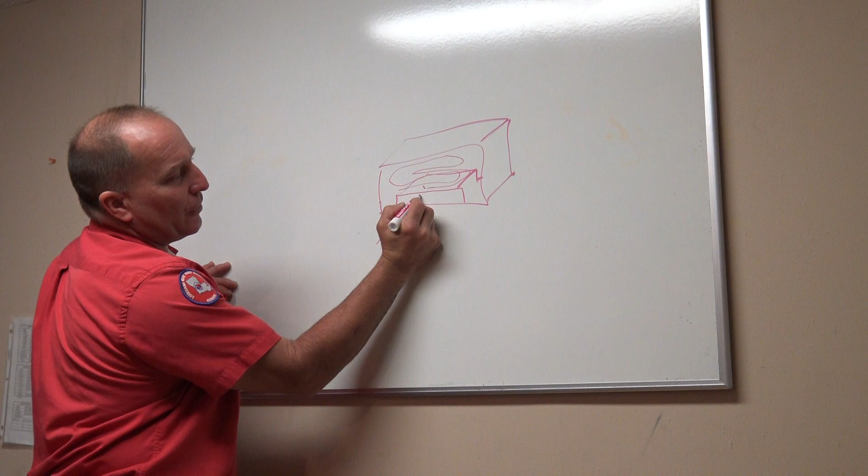So when you get inside of here, if I take a match with an extension, so here's my extension, and there's a little roach clip on the end of it, and you have two stove matches, which is what I use. First thing I'm gonna do is test this furnace with my limit switch, which means I undo my blower motor lead and run the furnace, let it overheat the chamber, get it hot. My blower motor's not running, my limit switch is sitting right here.

My limit switch kicks out, then I pull my burners out from underneath that Ducane furnace, I pull them out, set them on the side, and then up inside that chamber I need to find out if there's any cracks in that furnace. Now since my chamber is extremely hot right now, because I just overheated my limit switch, that chamber's hot like a son of a gun.

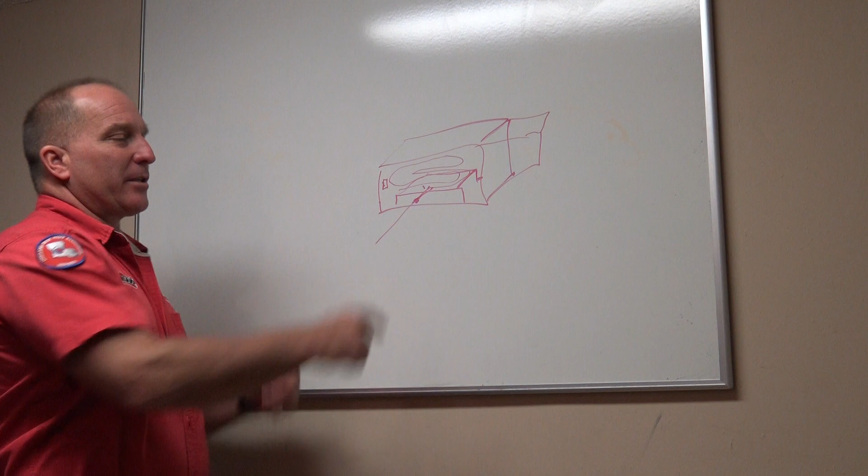The burners that I pulled out of there, I use lineman pliers and channel locks to literally unscrew everything and pull everything out and set it on the side. I'm not touching anything, or you could use gloves or whatever may be the case, but it's hot like a son of a bitch. It just got finished overheating.

When I do that, I take my vacuum, and my vacuum has got a PVC pipe with an elbow on the end of it. Then I stick that pipe up inside of there and start banging around up inside there with my PVC pipe, knocking all of the rust that's in that chamber down.

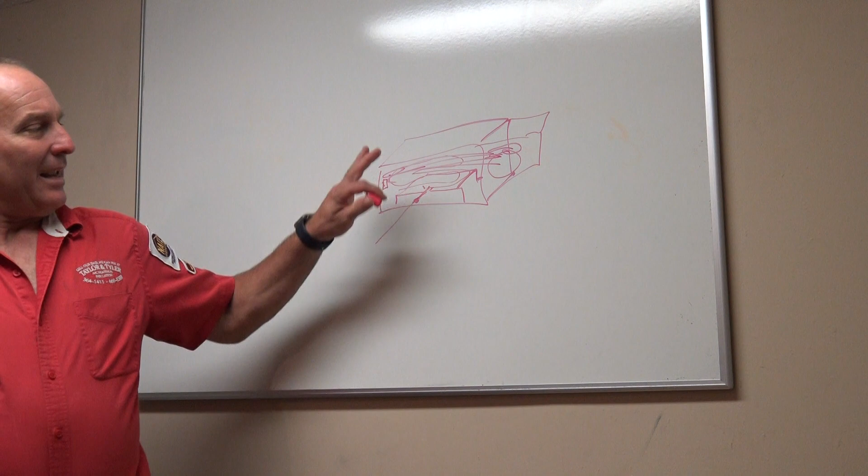Then I take my match with an extension. I plug my blower motor back in. So when that blower motor comes back on here and it's blowing air across my chambers, any air pressure in that chamber is going to blow down if there is a crack in the chamber itself. Because if you look at it, if you're behind here and you move the blower motor out of the way, here's what you're looking at now. Now I'm looking through, I am the blower motor looking into my chamber, and this is what I'm looking at.

So air is passing here, here, here, and here. If there's a crack anywhere, air as it blows is going to blow inside my chamber here. Remember, inside my chamber is underneath here, because that's where your flame is going, right? Your flame goes inside this chamber and attaches to your draft hood up at the top. The air is passing on the outside of your chamber, which you can't see because it's inside the box. So air pressure gets into the chamber and then blows down inside of here.

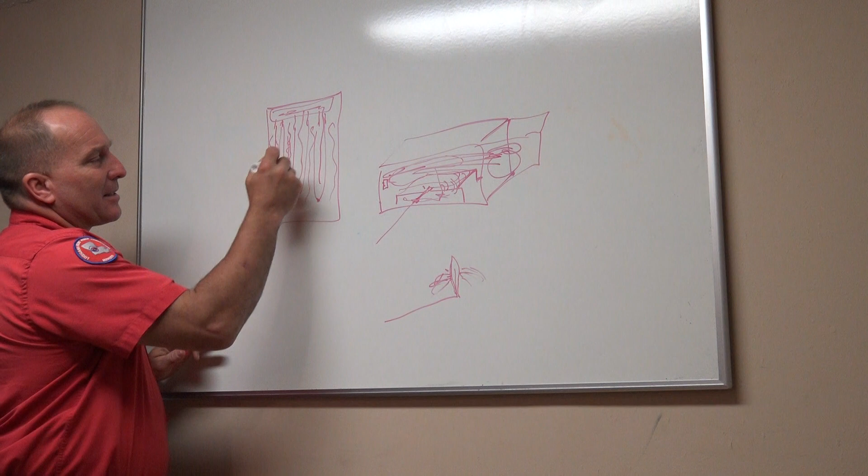When I stick that match up inside there, what am I looking for? Here's my match extension, here's my flame coming up with a point on it, coming back down - there's my nice flame going up inside there. If my flame starts doing like this, what happens? That's air - that means I'm getting air from inside this blower compartment into my chamber, and it's blowing down, which is where my match is at.

There's a crack in the furnace right there. Shut the gas valve off, system's condemned. Now, I was telling you I went to Algiers.

I did this exact heater check on the system. Went up there, told the customer, a 22-year-old furnace you got up there has got a crack in it. I tested it and you are blowing down, you got a crack inside that chamber. I said, I can get you a price on a new furnace. He said, you can give me a price on it. I don't think I want to replace it right now.

I said, now, that's a crack in your furnace. That's carbon monoxide leaks in your house. He goes, yeah, but I got carbon monoxide detectors in every room in the house. I hardly ever run the heater, I like it really cool, I barely turn my heater on. I think I'll be all right.

Again, sir, I'm going to tell you, that's a crack in your furnace. That's carbon monoxide leaks in your house. Carbon monoxide leaks are a deadly killer. It is unsafe to run that furnace. He said, I understand what you're saying. I'm not going to have you at any type of liability - it's my decision to run that furnace. There's nothing I can do about it.

I wrote it on my invoice: customer understands there is a crack in the furnace, understands it is unsafe to run the furnace, and decided to run the furnace himself. So I leave, nothing I can do. He doesn't want to do anything with it, right? Next year I come back, do a heater check again.

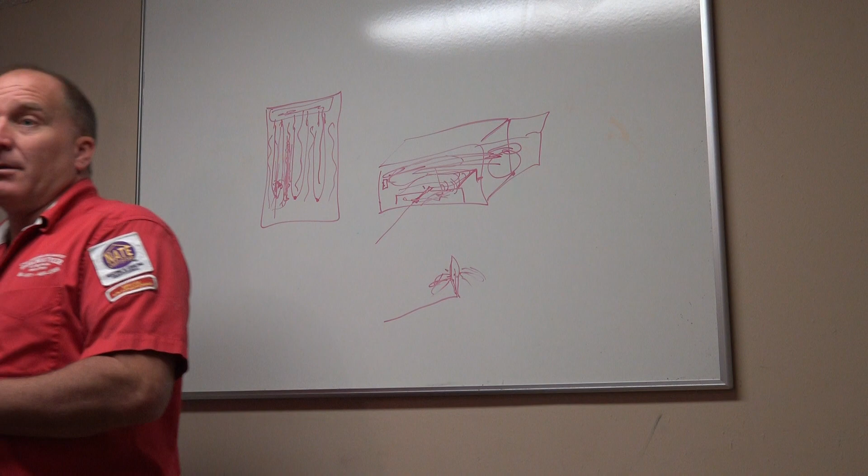Went back, I knew right where it was. Boom, found the crack again. Sir, you got a furnace crack as I told you last year. The crack is still there, it's getting a little bit larger. It's really unsafe to run that furnace, it's only getting worse for you. He said, how much is a new furnace? This time he replaced the furnace. It took two times - it happens.

You know, sometimes they just don't have the money. No money, no life, whatever.

Now let me ask you this: because you have a crack in the furnace, does that mean you are putting carbon monoxide in the house? No. How's carbon monoxide formed? It's formed in the exhaust gas from the furnace.

If you have a perfect running flame, a beautiful flame, then you may not be producing carbon monoxide, or enough carbon monoxide, in that flame. If you have a bad burning flame, lack of oxygen, you can produce carbon monoxide. So if he has a clean burner and his flame is nice and blue and pressures are good and everything looks good, and he's just got a little bitty crack and he hardly ever runs the furnace...

He likes it 60 degrees in the house, 50 degrees in the house. He'll hardly ever run it, he might kill the chill. It's his responsibility - I've got to tell him he's got a crack and it's unsafe. Is he literally going to put enough carbon monoxide in the house to kill the family? Probably not, but you can't say that. You have to say, I'm recommending replacing the furnace. It's unsafe.

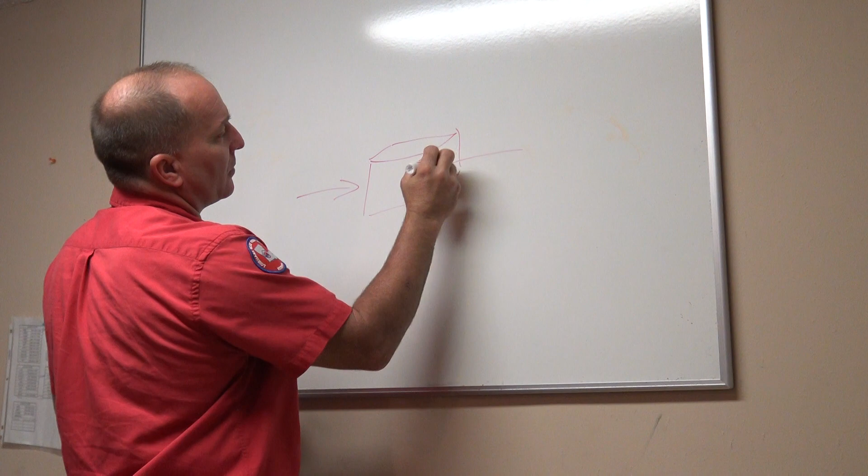This is coming in and this is coming out. Okay, got your hole coming in, coming out. Right here, there's going to be like a little port, basically. There's a little screw right there that you unscrew, and then you take your manometer.

The one that I have is a Fieldpiece, and there's a P1 over here and a P2 over here. You turn your manometer on INWC, inches of water column pressure, for your reading. Then you take your hose from your P1, actually it comes from the top, not the bottom, and this is your return.

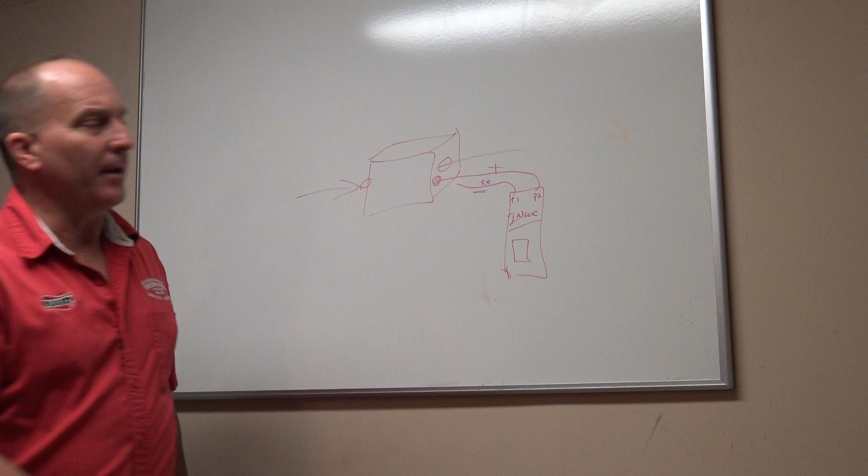I'm going to call this return, and this is your supply. Because we are doing gas pressure, I want to measure my supply, my positive pressure. This one's negative, this one's positive. You do not hook the negative up to it, okay? So this is positive on here.

When you energize your gas valve right here, here's your coil on it, which is going to be W and C, energizing your coil. When you energize your coil, there is a plunger basically on here that is going to hold down your gas valve, or energize your gas valve, which allows gas to flow through.

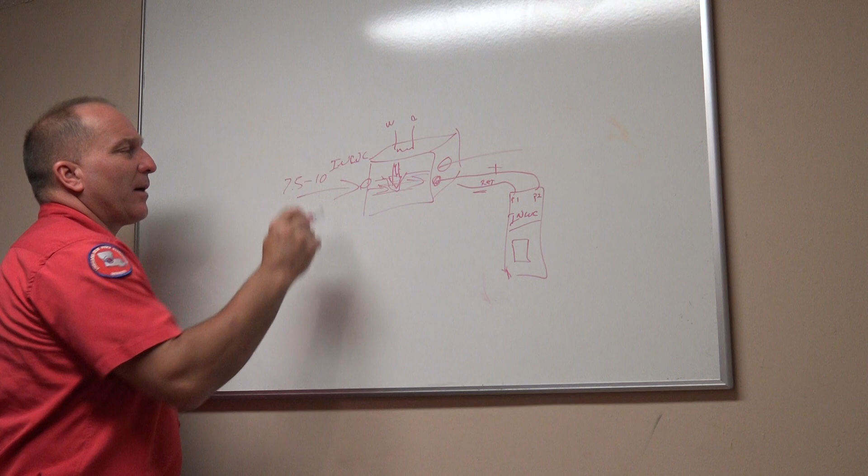Now, you energize it, the plunger comes up, gas is through it. You are now reading the pressure coming out of the gas valve. Coming in the gas valve, you should have 7.5 to 10 inches water column pressure. Coming out of it, you should have 3.5 inch water column pressure coming out of the gas valve.

Now, where does it go from here? It comes out and literally goes into your burners. There's burner 1, 2, and 3, okay? These are your little jet engines that you see on your burner systems, and they are shooting flames into your chamber.

When I have my port connected here and I have it on P2 in inches of water column pressure, I should be reading 3.5 inches of water column pressure on my manometer. If I am reading 2 on the manometer, does that mean my gas valve is bad? The answer is no. That just means I'm getting 2 inches of water column pressure out instead of 3.5.

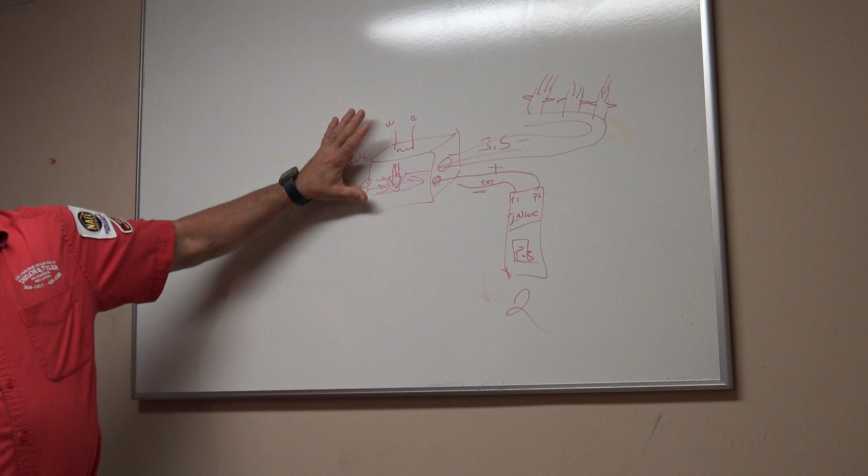What if I do have 10 inches of water column pressure pushing in, but I'm only getting 2 out? Up on top of the gas valve here, there's another screw, a regular screw right there. You unscrew that one, and then you stick your little screwdriver down inside of there, and down inside is another little port with another little screw on it.

What you do is you unscrew it. What am I doing when I unscrew it? I'm actually allowing this plunger to go up higher. So now my 2 inch water column pressure, I can adjust it to 3.5, if the gas valve's good.

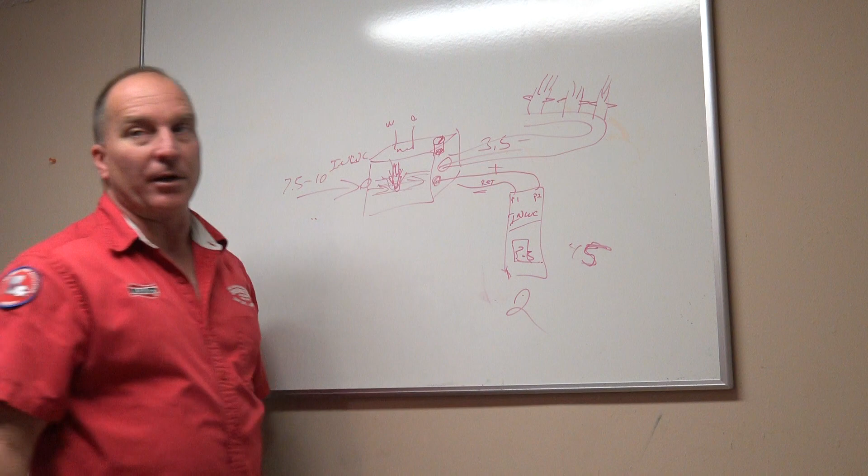So let's just say the gas valve's good, and I'm getting 4.5 out of it instead of 3.5. What do you do? Same thing. Unscrew this, stick my screwdriver down into it, tighten it up, loosen it up, figure out which way I'm supposed to be going, until I get it to 3.5 inch water column pressure.

The amount of pressure coming out through these burners shooting out makes a huge difference. If I have 2 inch water column pressure, my burners are going, and you will get to understand the sound of a good, short burner with 3.5 inch water column pressure.

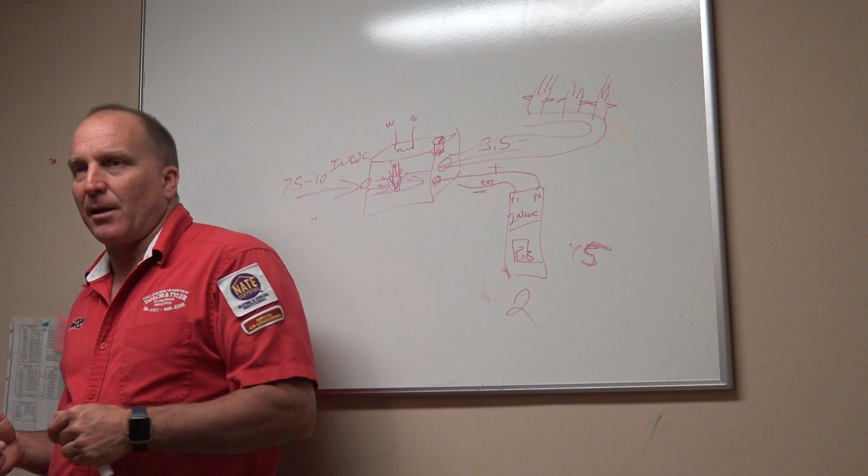So when it comes on with 2 inch water column pressure, the flame's going in nice and pretty, but it doesn't sound right. If you've got a good force of pressure going in, you'll hear it, because 99% of the furnaces you go to have the right gas pressure. 1% you may run across that don't have the right gas pressure. If it's 4 to 4.5 inch water column pressure, you may hear that thing blowing hard out of there, heating it up fast. You need to notice that doesn't sound right.

Do we have to check water column pressure on every single one we go to? The answer is no, we don't have to.

Should we? Just for our own enlightenment? The answer is yes. It takes 2 minutes to hook it up and check it. You get to check a few of them, and you know what gas pressure is coming out of that system, and it may be 3.6, 3.2, 3.5. It's running good, the flame's burning good. Do you have to make an adjustment from 3.2 to 3.5? No.

So I've been on a floor furnace. And you know, in these videos, guys, the main thing I'm going to tell you is that you won't get in a book, and a lot of times you're not going to get at Delgado's. You're going to get 30 years of experience in this video, because I'm going to give you stories that I've come across in the last 30 years, all the service calls I've been on, the problems I've come across. These are the things that actually mean something when you're going to customers' houses learning this stuff. Stories can ramble on, but they are some of the most important things to remember, and it's something not to take for granted.

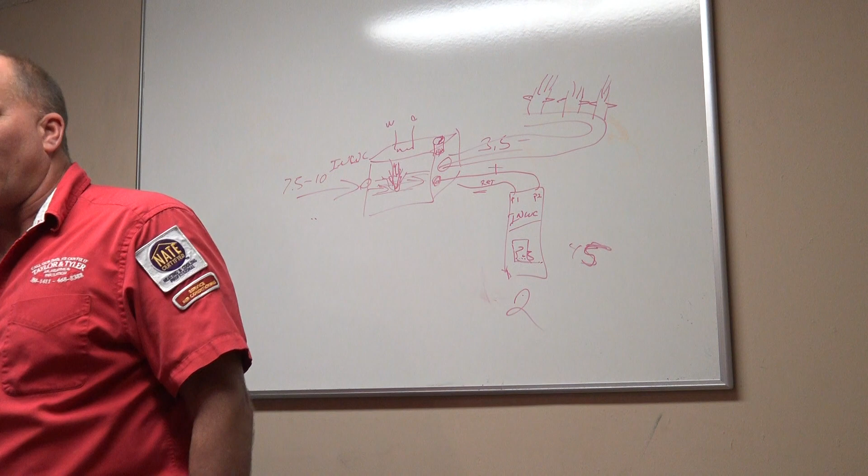It's all encased in metal, with a grate on top, and you get what's called waffle feet if you step on a floor furnace that's 50 years old. There's nothing stopping the heat coming from that floor furnace. There are no limit switches in the 50-year-old gas furnaces for floors, but there are limit switches in the new ones we put in today.

So if I take a 50-year-old gas floor furnace out and put a brand new one in today, customers complain the house doesn't get as hot as it used to. That's because there's a limit switch in there — the flame runs, heats up the limit switch, and shuts the system off. When it cools back down, it closes again, and the floor furnace comes back on, only allowing it to produce so much heat. Whereas the old one, 50 years old, had no safety features at all, and they just got hot as a son of a bitch.

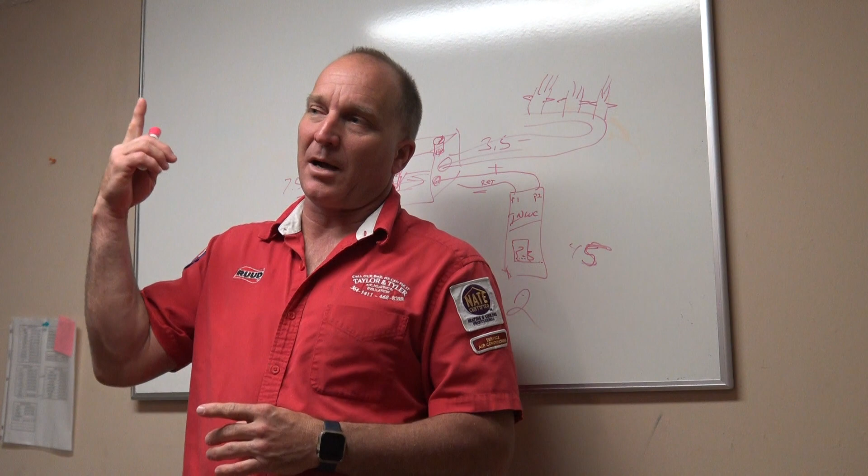You learn from one time of waffle feet — you don't step on the grate anymore. It only takes one time. Unless you're really stupid, then you get waffle feet for sure. Some of those are hot — grandma had all those in her house, boy they are hot. You learn one time.

Now, can that floor furnace catch a rug on fire? Yeah, absolutely. There are no limit switches in those old ones. That's why they're in houses with wood floors, and again, they're all encased in metal, but those floors get hot. I've seen a bunch of times where little rugs get pushed over to the floor furnace and catch fire, or burn up and singe really good. What if your couch is right next to it? Potential for fire. So you've got to look at all that stuff.

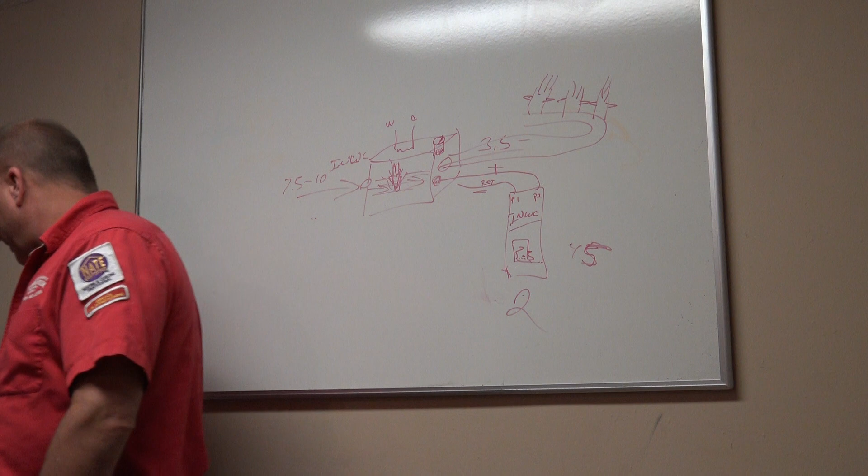All right, so we're still on gas valve, right? I get off on tangents, don't I? Okay, tangent aside — gas valve energizes, static pressure 3.5 inches water column pressure, not high or low. A fair valve may be old but in working order. Bad: 24 volts applied to the gas valve and it does not open, or static pressure too high or too low and the valve will not adjust. So if I'm running 5 inches water column pressure out of here and I start adjusting it and it doesn't adjust, I replace my valve.

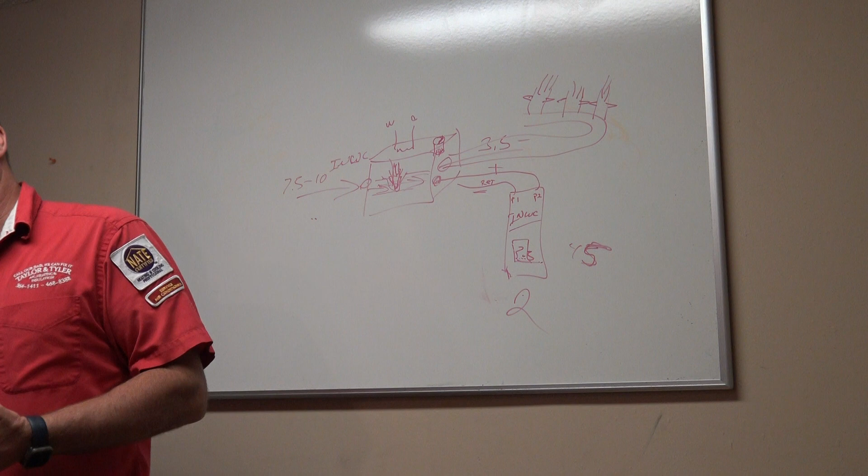Today's valves are what we call 100% shut-off valves. 100% shut off means what it means, the 100% shut off. Now, I'm going to give you some of the old kind of valves that you're going to run across on old furnaces. 100% shut off means that when my spark igniter is sitting over here and it's sparking onto my burner,

then I have a flame sensor rod over here sensing my flame. The only way I'm going to ignite the igniter is I have to shoot all my gas out of this whole system, and as it goes through here and this spark is in here, it ignites this flame, which goes down this little wing all the way across and ignites this flame, then goes through this wing over to this flame, ignites this flame. Then the flame sensor says, okay, I know I have flame here, continue to run, gas valve. That's today's furnaces right there.

If the flame sensor does not sense that there is a flame on the third burner, it will run for 4 seconds and then shut that gas valve off. It will try it again. The induced draft motor runs, pulls in my negative pressure switch.

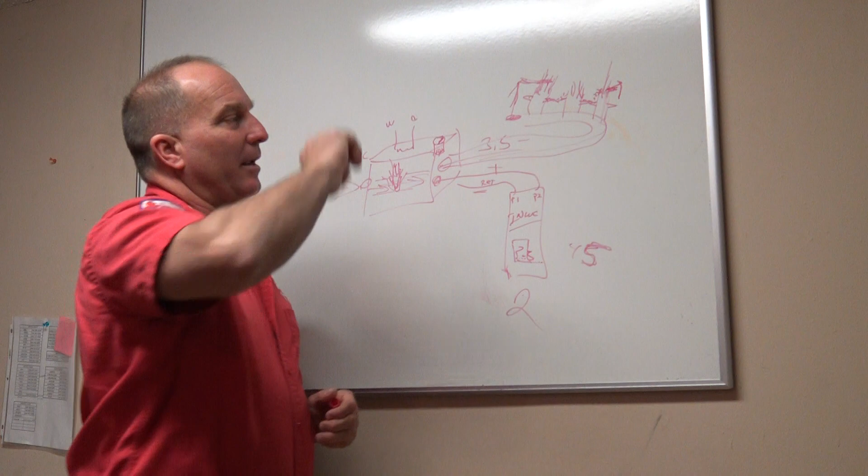Gas valve energizes when the spark igniter ignites. Boom, shoots out over it. Flame ignites on my igniter. It runs to my second one, it ignites. It runs to my third one, it ignites. It runs for 4 seconds.

If the flame sensor does not recognize that there is a flame there because of a bad flame sensor, a broken wire, whatever, it will shut off again. It will do this 4 times. After 4 times, it will shut the system off, and the only way you get the system back on again is you turn the power off and turn it back on, and then you try it again, and it will do it again.

How do you now fix the system? You have to test the flame sensor, which we're going to test in a few minutes here. We're going to test the flame sensor and see if it is getting the correct DC amperage.

A second type of gas valve is going to be like an 80% shut-off gas valve, which literally can light a pilot. So it's got a pilot tube coming out of it. We'll call it right here as a pilot tube. So this pilot tube is running down over here to my igniter. So my igniter would kind of look like this. So here's my gas would shoot through a piston right here, and then my flame would shoot out like this, and then kind of do like that, and it's a nice little blue flame shooting out of it, okay?

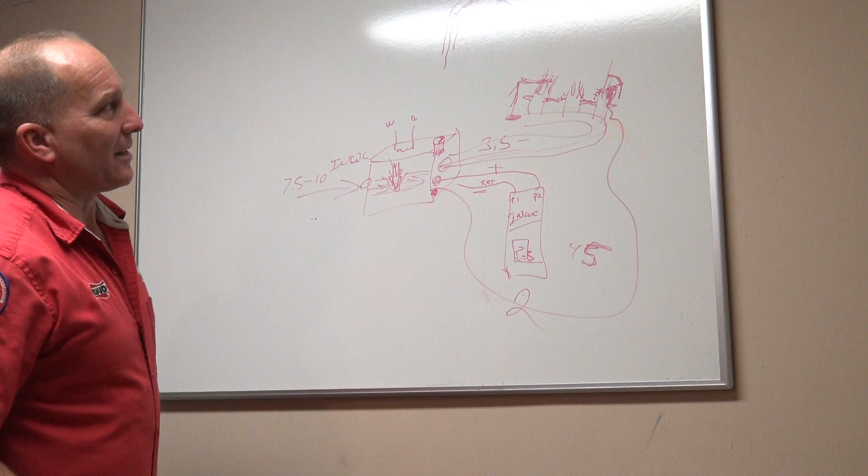So that little pilot is no more than, say, 2 inches at the very most, 1.5 inches or so, and that little pilot is shooting out across my flame. Once the pilot ignites, there is actually then a flame sensor on the pilot that says, okay, my pilot is lit now, so now it's okay to send the other 80% of gas through. Remember, my first opening was only open on a pilot tube, which is a little silver tube about the size of a pencil.

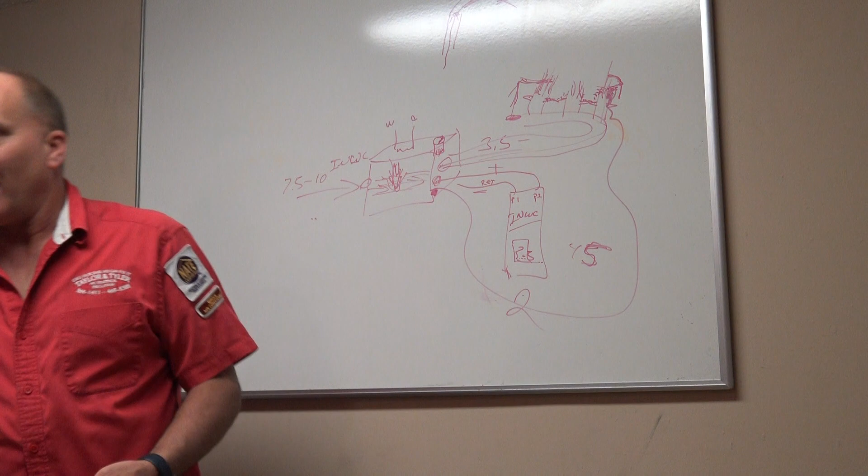If you have to take apart that pilot tube, I am going to give you some tips here that will save your ass if you remember them. You won't remember them the first time. You're going to have to replace the gas valve, is what you're going to have to do. Then it will cost you a couple hundred dollars, 2 hours of your time, and then you will go, I think Eric told me something about that. Let me go watch that video again. And here's what it is.

That little pilot tube has got a brass fitting on it. So it's a little silver pilot tube with a brass fitting. It's got a... can't think of it, flare. It's like a flare. It's not a flare, it's a little dial on the end of it, and it released... I can't think of the name for it anyway, I'll think of it in a second.

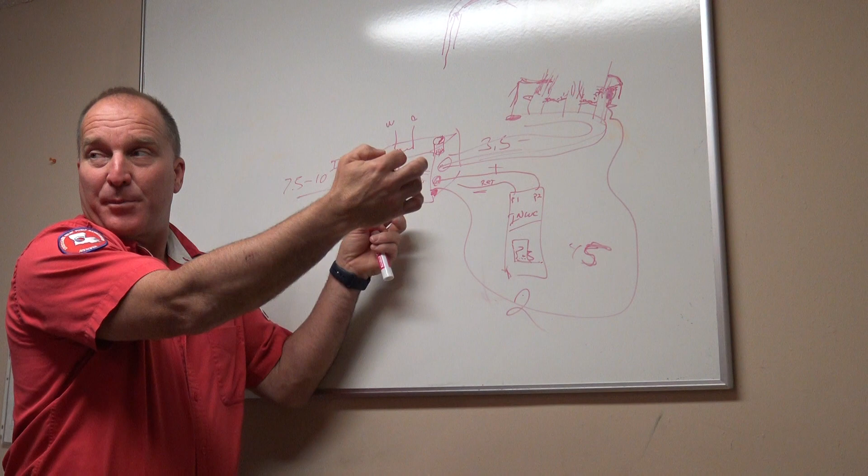But as you screw the brass fitting on, the little brass piece on the end flares out and basically grabs the little silver tube and crushes it, stopping gas leakage. It disconnects from the brass piece, so now I can unscrew the brass piece, and that little brass piece that disconnected is clamping the silver tube. Now here's where experience comes in, from how I've screwed it up and how I don't screw it up anymore.

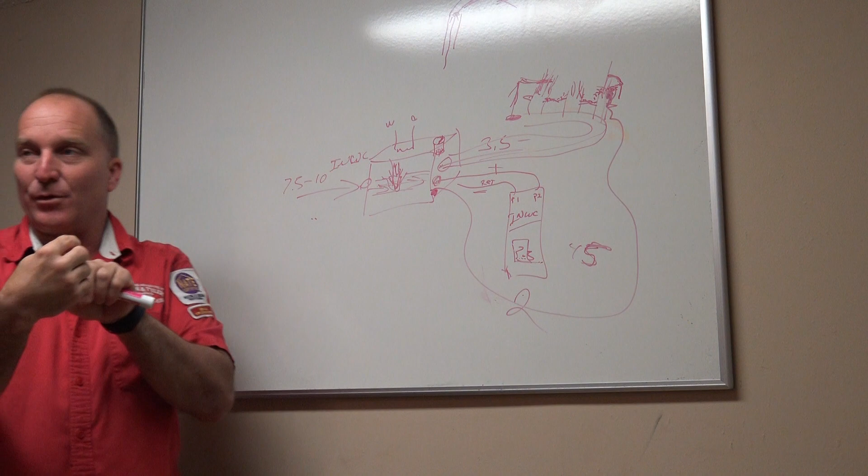Every time I tell somebody to do this, they will screw it up at least once. When I take that pilot tube out, it unscrews, so the brass piece continues to roll and slides up and down on that little silver tube - a ferrule, that's what it is. So the little brass piece is connected to the ferrule. When you screw it in, the ferrule ends up flaring or crunching down onto the silver piece.

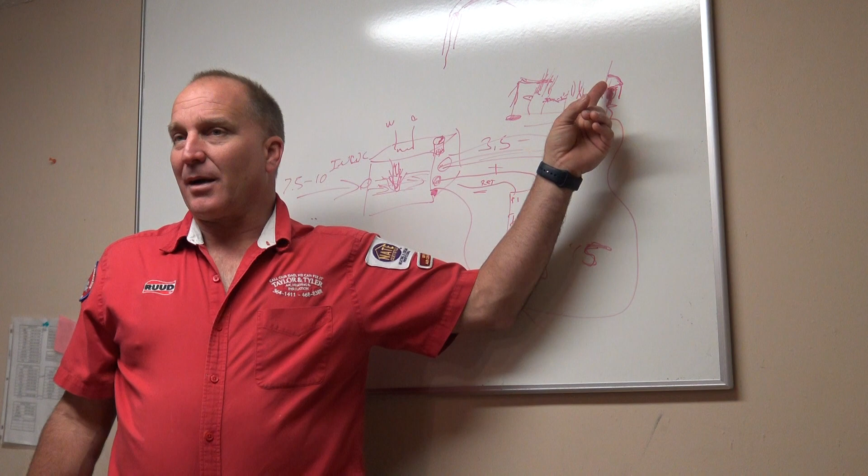That's where it stops your leakage and adheres to it. So as I take the pilot tube out to start this system up, my pilot isn't having a flame come out, or it's a very, very little flame barely coming out of it. So I know I probably got a clog in that pilot tube, right? Well, how do I clean the pilot tube out? I'm going to give you a simple way to clean it out.

You realize this ain't but like a gnat's fart of gas pressure coming out of here, right? So you take this out, and then take your dry nitrogen tank. After I pull it out, I put my dry nitrogen tank and blow it through there. It's just a piston, a little bitty pinhole in a piece of metal, is all it is. You're not going to blow a big hole in it. You're just going to build up pressure on it to force more pressure out the other side. And if there's any crap in it, it's soot.

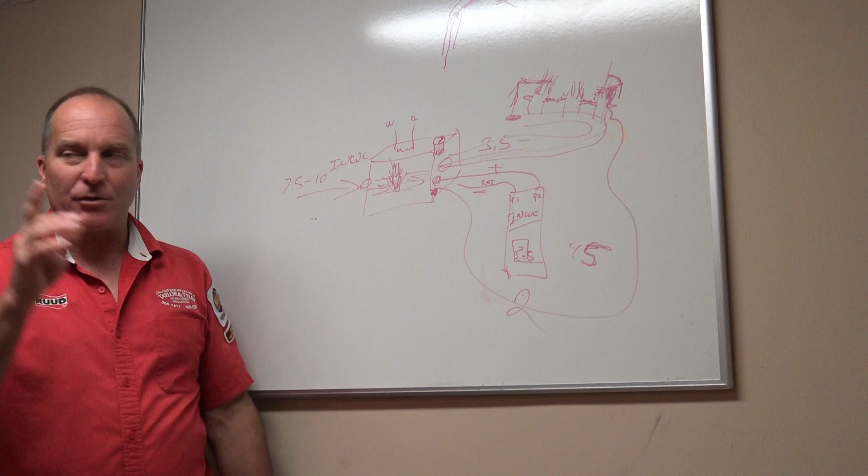So you can easily blow the soot out with high pressure dry nitrogen, right? So I just hook my little dry nitrogen tank up to it, and I blow it out. And then here's where the experience comes in. When I go put that silver tube back into my gas valve - remember, when you loosened it up, you could grab it with your finger and loosen it and take it out. When you put it back in, this is where the experience comes in.

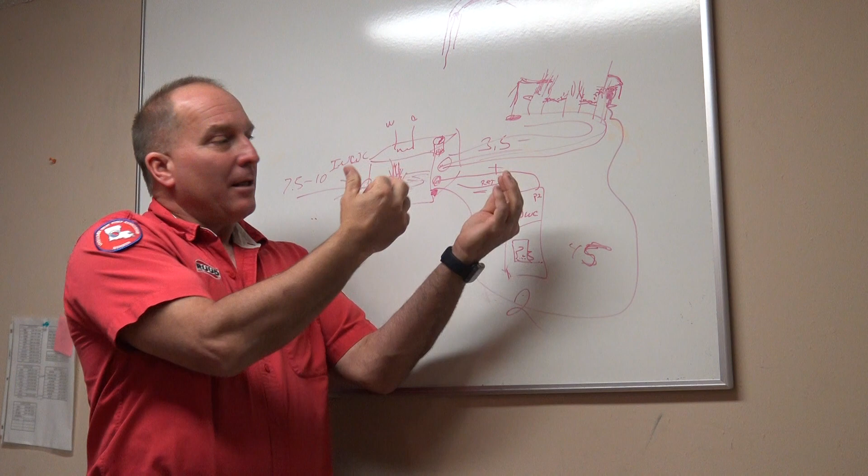When you put it back in, you have to wiggle that silver tube just in the correct position to where you can still tighten it back up with your fingers. If you put it in and you can't tighten it up with your fingers, you are cross-threaded. So if you grab your crescent wrench and start tightening it right there, you just screwed up the gas valve, because the gas valve is going to cross-thread, not the brass piece.

So now you've got to buy them a new gas valve, because it will not go in now. So the most important thing, as you're putting it in, you keep wiggling that tube this way, that way, this way, that way, this way, till you finally get that thread just right and it goes in with your fingers. If you can't get it in with your fingers, do not put a wrench on it. You will buy them a new gas valve. Trust me, I have done it.

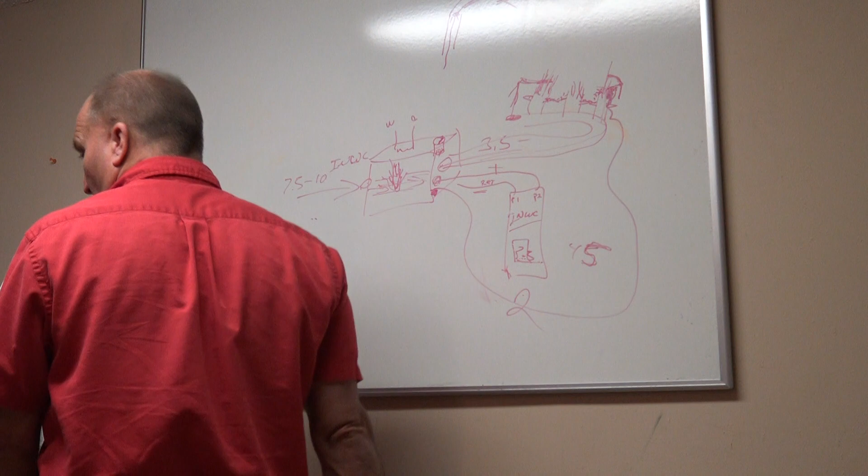The other kind of gas valve will be a pilot thermocouple gas valve, where there's a thermocouple coming off the top of the gas valve. So you've got a little deal coming up here, and then a thermocouple that runs over, and there's your thermocouple out here. You take the little knob, push it down, and put it in the pilot position. As you put it in the pilot position and push it down, it allows gas to flow through here.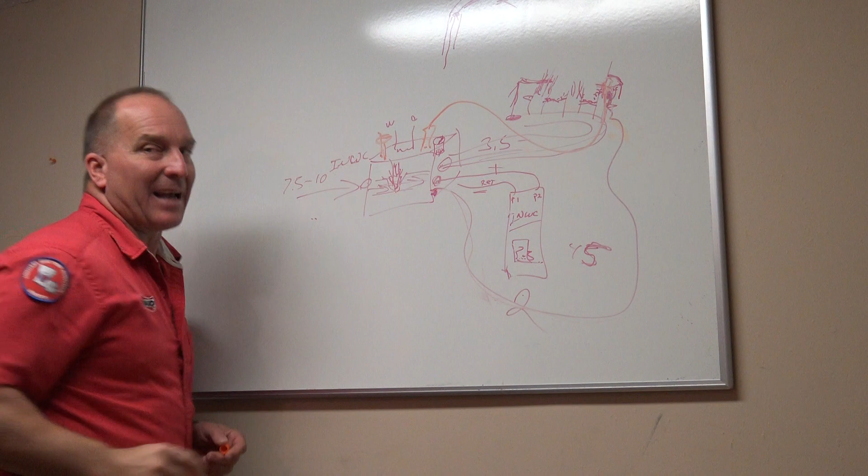You light your pilot with a match. The flame comes out, hits your thermocouple. The thermocouple heats up, gives your resistance back, and holds the gas valve down. Because as you're pressing this down, it's allowing this plunger down here to release that gas valve, but it's not going to allow it to come out until you turn the gas valve to the on position and energize it, okay? So I light my pilot.

After I light my pilot, I let my little compression thing up, and after I let it up, my pilot should stay lit. As it stays lit, now I can turn this knob into the on position. When I turn it into the on position, then I can apply 24 volts to my gas valve from my thermostat by turning my heat on.

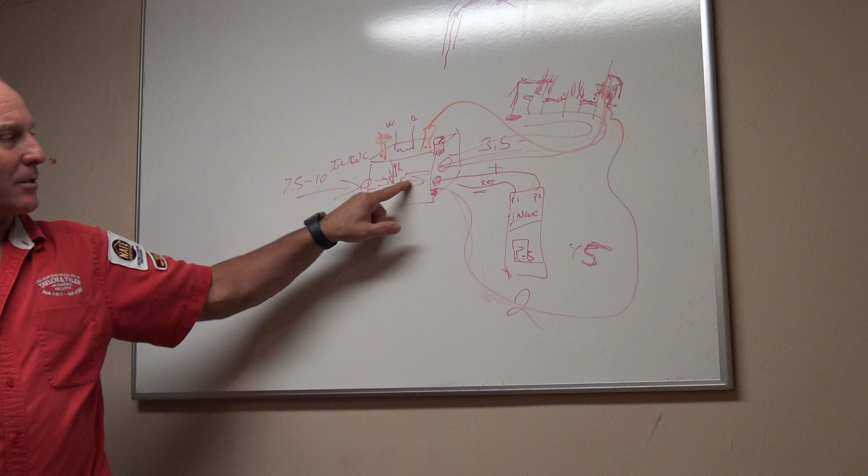It brings 24 volts to my gas valve, which then brings the plunger up, allows gas to flow through. Now I got gas going into here. It lights my pilot, which is already lit. Gas shoots out, lights my burner. My burners go across, light each one of them.

And then my flame sensor, which the old ones don't have flame sensors on it. So your only flame sensor is your pilot, your thermocouple. If your thermocouple is not lit anymore, is not working, then nothing will work. If that thermocouple is bad, that's your flame sensor, remember. It's telling you they have a pilot there. If there's no pilot there, gas valve won't work. That's simple. So that is your flame sensor, the thermocouple.

They only cost like, they used to cost $2, they're probably $22 today.

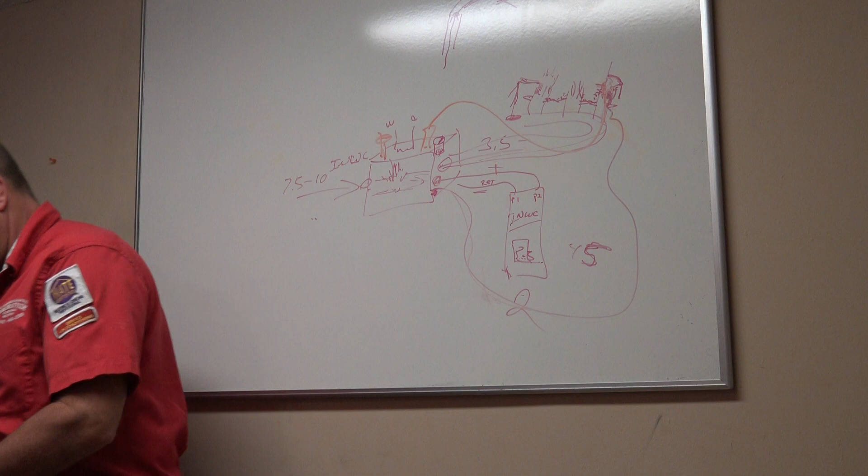Got a quick question. Yep. At one time, like you're talking about the pilot thermocouple, that's all they had on hot water heaters and central heat systems. Today, hot water heaters still only have a thermocouple, you just light a pilot. Same thing, there's no change in that because there's no voltage going to that furnace. And all a thermocouple is doing, guys, is just giving flame rectification, that flame is there and allowing that gas valve to energize. So when you turn it into the on position and you take your thermostat for your water heater and you turn it into hot, it then closes the circuit and it allows the gas to energize on your hot water heater and turns it on.

If you take a millivolt gas valve, now a millivolt gas valve is going to be one for a floor furnace. So inside there, you have three connections for your wires.

And then you have a pilot generator, and your pilot generator will go here, and then you have two wires coming down. One of them are actually connected right here, and then they branch off. And then one will go here. Then from here, it's gonna go with a wire coming up to your thermostat, and then back down, we'll jump over the wire there, and back down to the other side. That's a millivolt gas valve.

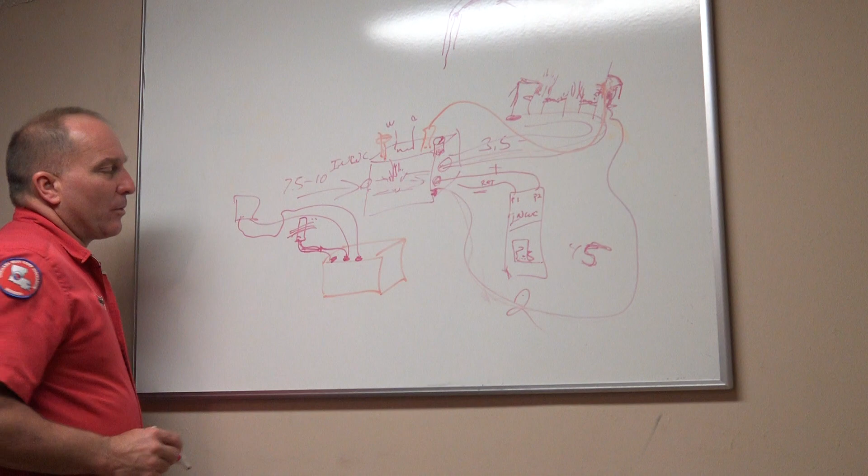You light your pilot, your flame comes over your millivolt, your pilot generator is what it's called, a pilot generator. Your pilot generator heats up, it produces millivolts. The millivolts therefore energize your gas valve, which say, hey gas valve, allow your gas to continue over my pilot.

So it's just like this gas valve. You have a little compression on it, you push down in the pilot position. When you do, it allows gas to come out, in order to shoot your flame out right here. Flame shooting out over it. Pilot generator heats up, produces millivolts, sends millivolts back to your gas valve here, energizes your gas valve here and says, okay, continue shooting gas through here.

Same as a thermocouple, pretty much.

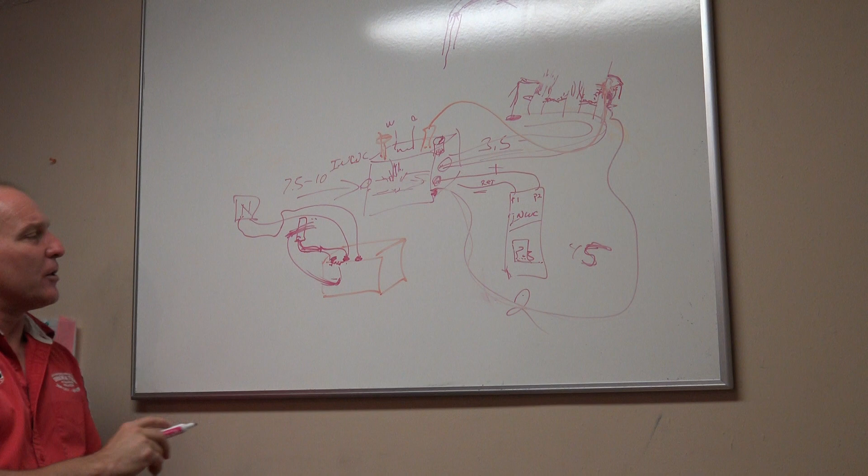Then from there, you turn your thermostat on, which is a normally open switch because you put it in the off position. You turn it heat on, it closes the switch, sends voltage from here to here, which comes over here, which your coil is now between here and here, which energizes your gas valve and allows gas to come out for your burners.

Simple. Just simple, simple, simple, simple, simple.

Yet they're so difficult to work on because they're a pain in the ass and they're underneath the house and nobody likes working on them. But technically, they're simple. Those are usually on floor furnaces. Yes, or wall furnaces. That's the exact setup that you're going to get.

Now, in between here, can you have a limit switch? Yeah, you could. Like wall furnaces will have limit switches. Again, 50-year-old wall furnaces, no limit switches. Today's, they kick off, you know, they're only going to get so hot today.

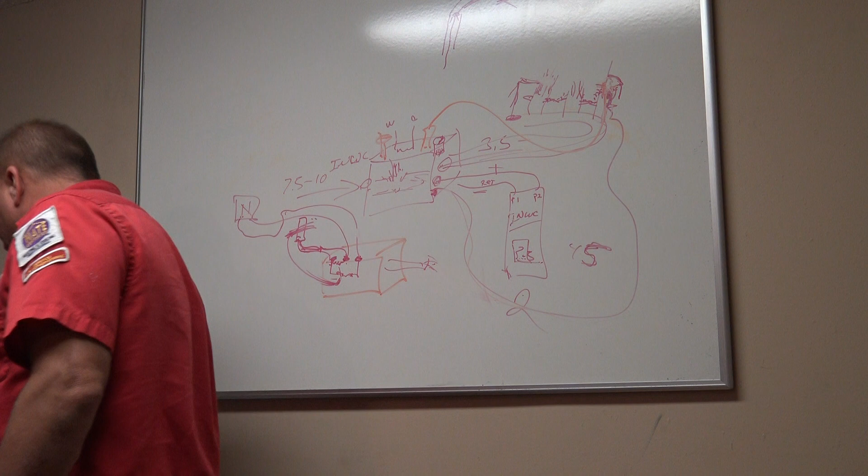All right, next one, we are looking at flame sensors. Flame sensor, guys, one of the most important things. The flame sensor senses the flame and produces DC current back to the board for flame rectification. It measures these amps in microamps, measured by removing the wire lead plugged into the flame sensor and putting your lead from your meter, one on the flame sensor and one on the wire tied into the flame sensor, usually orange. So you go to this flame sensor over here.

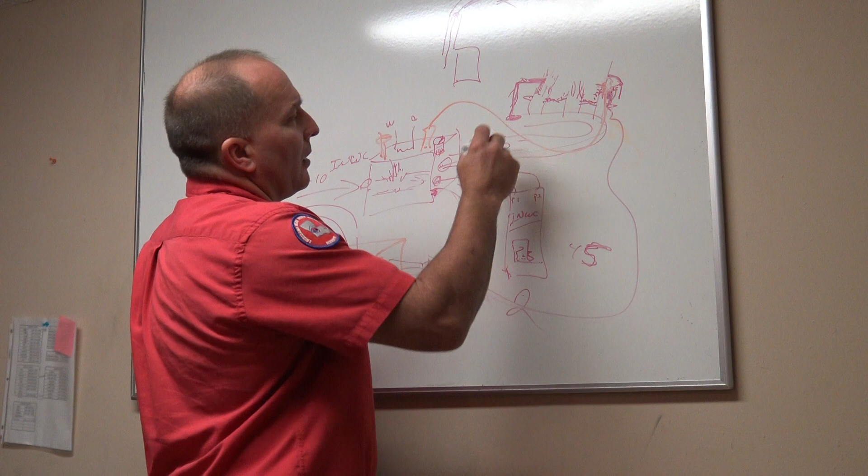Here's your circuit board right here. The flame sensor here is sticking out over your last burner. So if your pilot is over here and your spark ignition's over here, your last burner will have the flame sensing rod. It's an orange wire that goes and ties into your board.

It is a flame rectifier. There is not 24 volts going in there. It's DC amperage that you're actually measuring from here because it's actually sensing a ground with your flame rod. So you disconnect the flame rod, or the wire going to the flame rod.

You take your meter here, okay? Here's your amp probe, right? And you take one lead and put it here, that's your red lead we'll call it. And then your black lead, you're gonna tie it here, all right? And you're gonna put your meter on DC.

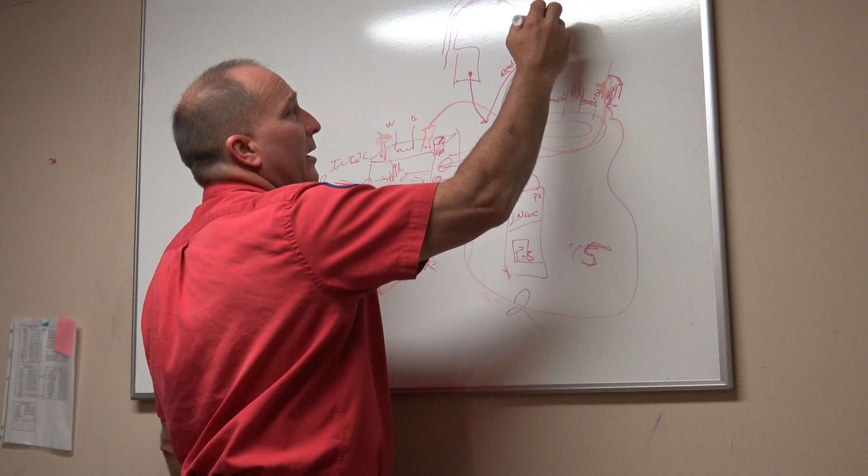And you are now going to be reading like 10 to 11 DC microamps. When you run your furnace, it will continue to run with your meter connected here, and it will read your DC amperage on that flame sensor rod. If that flame continues to run and you're drawing 10, 11 microamps on there, your flame sensor is good.

If it runs for 4 seconds and shuts off, and you're reading 5 DC microamps, it's your flame sensor rod. Replace your flame sensor rod and you're probably going to be okay.

If you're reading 10, 11 DC microamps and your system runs for 4 seconds and shuts off, it's not your flame sensor rod, it's probably your circuit board now. Now you replace your circuit board.

But years ago, man, we didn't know how to test the flame sensor. I'd ask everybody, we're talking 20 years ago, when all this first came out. Nobody knew how to test a flame sensor. Seriously, nobody knew how to test it. Everybody I asked, nobody knew. They'd say, they're only $2, replace it, see if it works, or bring the circuit board with you. Test the flame sensor first because it's $2. If it don't work, replace the circuit board. That was the answer back then.

Okay, so what is another kind of igniter for your system? That would be called a glow coil. A glow coil, you apply 120 volts to it. It basically heats up like a lighter, like a heating element, and then gas shoots out over it and that ignites the flame, which we'll go over in a minute as well.

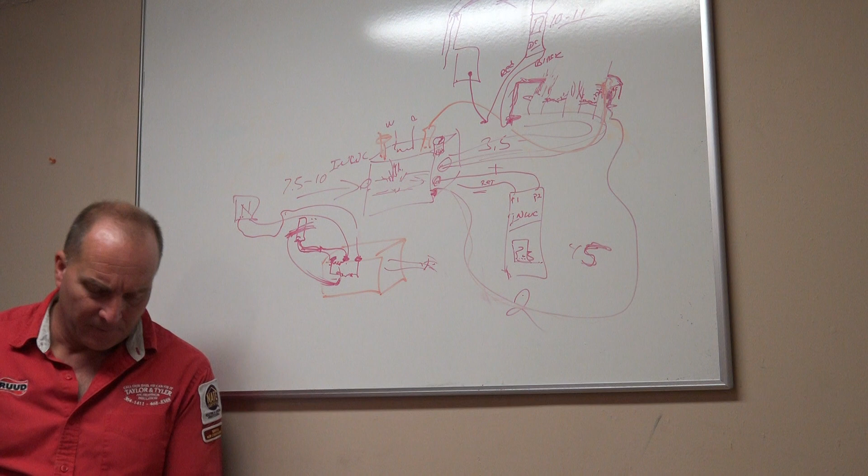ID, induced draft motor. This motor pulls in the negative pressure switch through a tube connecting the two. The motor is powered by 110 volts. There could be debris inside the housing of the motor from installation. Remove the vent pipe, run the motor, see if anything blows out. The motor is okay if it runs and pulls in the negative pressure switch.

It's rusted if the motor is rusted. If it's very probable that the inside is corroded, remove the IDM and check the inside for rust and debris. Also, where the tube is connected, you can pull the tube off the induced draft motor, take a little piece of thermostat wire, stick it in there, and make sure there's nothing clogging up that hole as well.

But in the past, not today's furnaces, but in the past, they used painted metal material that would heat up and all the paint would actually come off inside the induced draft motor. They used a certain metal on the blower motor itself on the induced draft motor, and the blower motor would literally completely corrode and fall apart. Like you pull it out and there's no blower wheel. From the paint?

From the type of metal they were using when they first came out with all this, you'd think that with engineering they would figure all this shit out before they put it into production for years, and then we gotta pull all that shit apart. I mean literally pull little blower wheels out and there's no wheel left on it. You'd think that they would test it, you'd think that when they're engineering this thing they'd go, okay, we're gonna use this metal that I don't know if it's gonna last a long time or not, we don't know if it's really gonna rust. Well why don't you try it first for several years, then put it in production, instead of putting pieces of crap out on the market that we gotta tear apart and replace all the time.

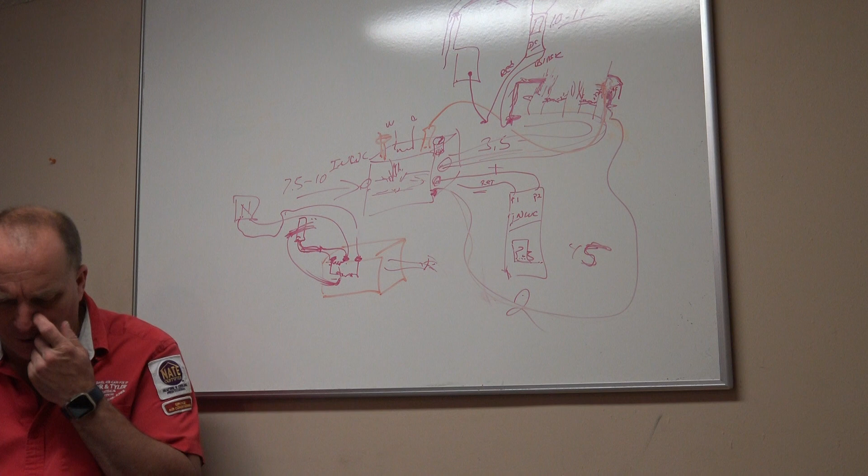Next thing is your negative pressure switch. The negative pressure switch is normally open, it closes from the induced draft motor running and pulling in the switch. Switch closes upon rise in water column pressure created by the induced draft motor closing. Inches in water column pressure is listed on the pressure switch, measured with a manometer hooked into the IDM. Closed when IDM is running, no problems. Open is a bad switch, will not close. Verified with manometer, measuring the inches in water column pressure above the closing pressure labeled on the negative pressure switch.

So if your negative pressure switch says negative 0.3 inches water column pressure, and you test the induced draft motor with your manometer - so here's your induced draft motor, here's your little blower wheel inside of it. Right here is a little tube, and that tube comes out and goes into the negative pressure switch, into that tube. Then there's 2 wires coming from it, and this is going to your circuit board.

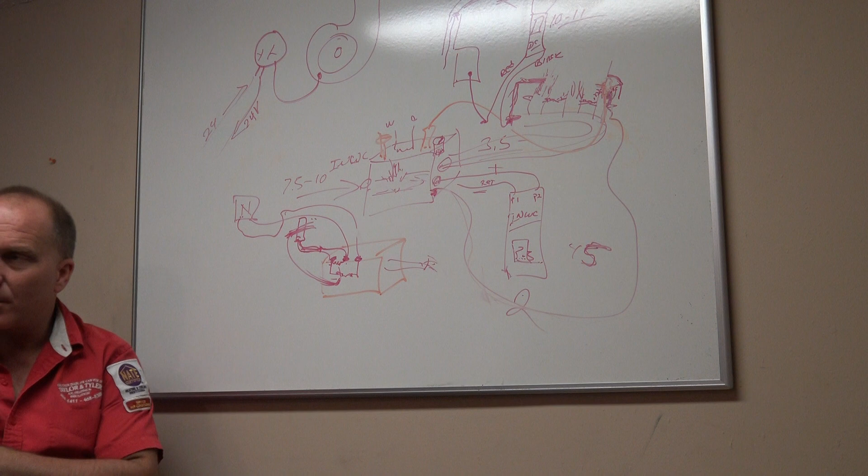24 volts will go into your switch. When the switch is normally open, it will close when it's sucked in, and then 24 volts will go this way. When that circuit is closed, it will then allow more things to happen with your furnace, such as the spark igniter will start sparking if all of your limit switches are closed. If all of your limit switches are not closed, you will not get a spark igniter because the system thinks it has too much heat. The blower motor will run, the induced draft motor will run, and you will get no heat, no gas valve being energized, no spark ignition. If the negative pressure switch does not close, nothing else will happen other than the induced draft motor running. Blower motor may even come on because it may be thinking, hey, I have a safety switch here, maybe I got too much heat, let me turn the blower motor on too. But if the induced draft motor does not close this negative pressure switch, nothing will run.

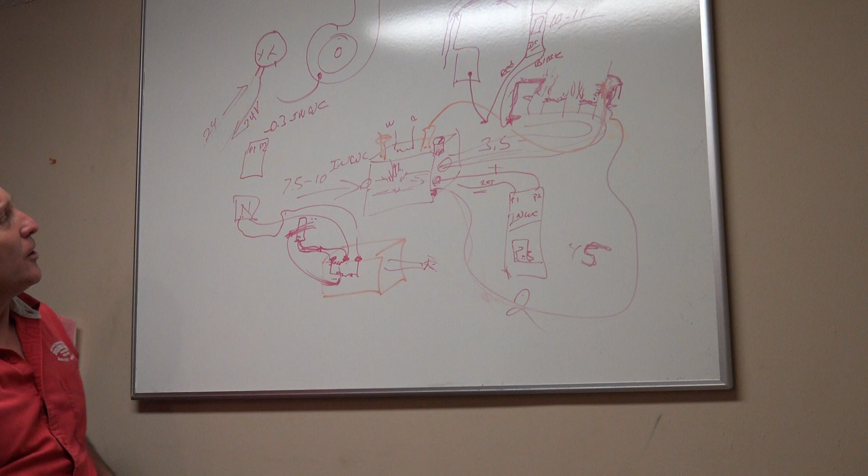How do you test this? You read the negative pressure switch - I'm making this up, say we have negative 0.3 inches water column pressure. With the induced draft motor pulling in, you pull the tube off of here, you take your manometer over here. You got P1, P2. P1 is your return, which is a negative pressure. P1 will go and connect into here. This says negative 0.3, I am reading on my meter negative 0.5.

If I'm reading negative 0.5 and I'm supposed to close at negative 0.3, I got a bad switch. If I'm reading negative 0.1 and my switch is not closed, I have a clog somewhere in this tube, or an induced draft motor blower wheel that's corroded down to nothing, or debris sitting inside of this induced draft motor here, which is not allowing negative pressure in there.

Another story - love these stories, don't we? It's like my kids telling bedtime stories here. Brand new furnace, old man installed it, been in the field for many, many years. Lady called me up on a Saturday in Destrehan.

One of my friends installed a furnace for us, and he just cannot figure out why this furnace will only run for 3 or 4 minutes and then shut off. It'll fire up, run 3 or 4 minutes, and keep shutting off, keep shutting off. I said, well, I can figure it out, but here's my service fee.

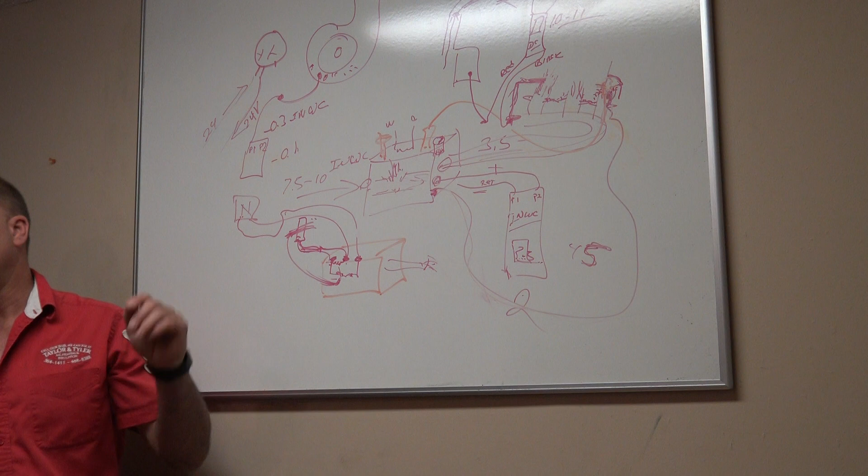Okay, come on. So I went over there, turned it on. Burner would light up, induced draft motor comes on, pressure switch pulls in, gas valve energizes, system's running. I sit there for 2-3 minutes and all of a sudden, boom, shuts off.

Spark igniter comes back on again, lights back up, burners are running again. Runs for 2 or 3 minutes, shuts off again. Kept doing that. I said, okay, something is shutting my gas valve off very quickly.

So what I did was I put a meter right here on this negative pressure switch and ran it again. As I ran it, I'm reading 0 because my switch is closed, right? Watching my meter, 3-4 minutes goes by, finally the burner shut off again, and I read voltage for that long. I went from 0 to voltage for that long. My negative pressure switch opened for that long, which just shuts your system off, that's all it does. Lets you run it again.

I said, okay. I took my induced draft motor off, looked inside of it, and there's a 7/8 copper coupling in there. Put my induced draft motor back on, put my vent pipe back on, turned it back on, boom. Ran fine.

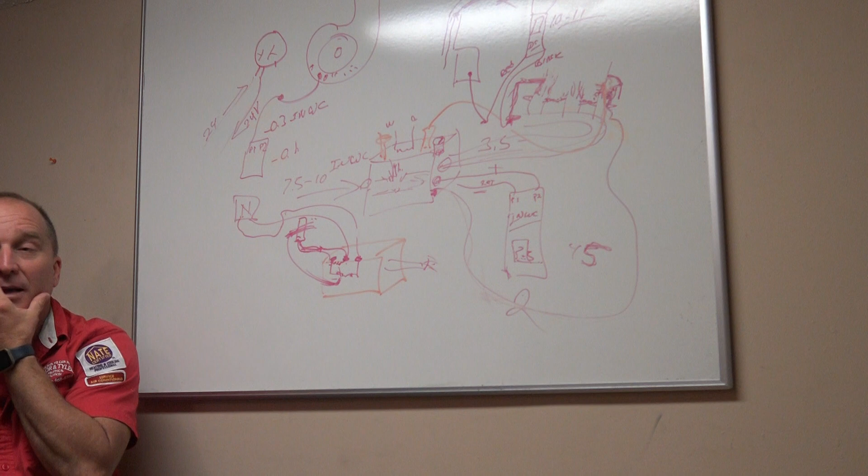A 7/8 copper coupling was up inside there, and that was causing turbulence up inside that induced draft motor, which would not allow my negative pressure switch to continue to be pulled in.

So, induced draft motors are very important. There's your start of the system. Negative pressure switches are a safety feature. What is your induced draft motor doing? If you go to your chamber, guys...

Here's your chamber, okay? And you got your burners up inside of here, right? We'll just draw 2 of them. Your flame is coming up inside here, or let's do a different one. Let's do your chambers today as opposed to yesteryear's chambers. I'm just showing my age, nothing more, nothing less. All right.

So if you look at a side view of a chamber, which is going to be a hole, there's your side view of a chamber, which goes into a box up at the top. Then you'd have another one right next to it, and there's your burner coming around through here, right? Comes out and then comes up top, and it's going into your box up top. That box is where your induced draft motor is actually tied into, and it's sucking from here, which is creating a negative pressure through here, and on the other side of here is what? Is your little in-shot burner, isn't it?

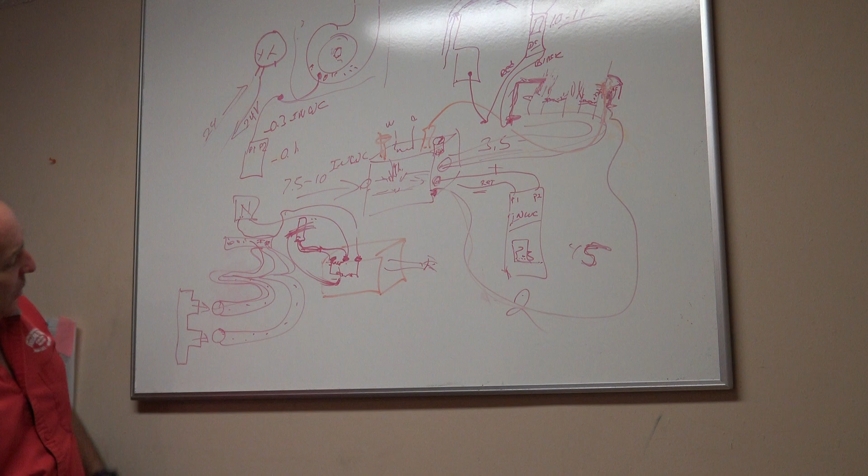Okay, so here's your gas shooting out here inside your in-shot burner, right, inside those chambers, bringing gas flow through into the housing where this induced draft motor is attached. It's sucking through here, which is creating combustion air sucking in through here, plus sucking the gas in as well. When it ignites from your spark igniter right here, now it ignites and everything's burning nice and pretty up inside there. The heat goes through, goes into this little collection box here, which the induced draft motor is running and throwing up your flue.

If there's a bird nest in your vent pipe, it doesn't allow the air to come out, which means your negative pressure switch will not be pulled in. You got a rollout switch, go trip? No, because your negative pressure switch is not going to allow the burner to come on. There could be a bird's nest, which I've seen before, inside the induced draft motor, because a bird gets in the vent pipe. A little sparrow gets in the vent pipe some kind of way, shape, or form.

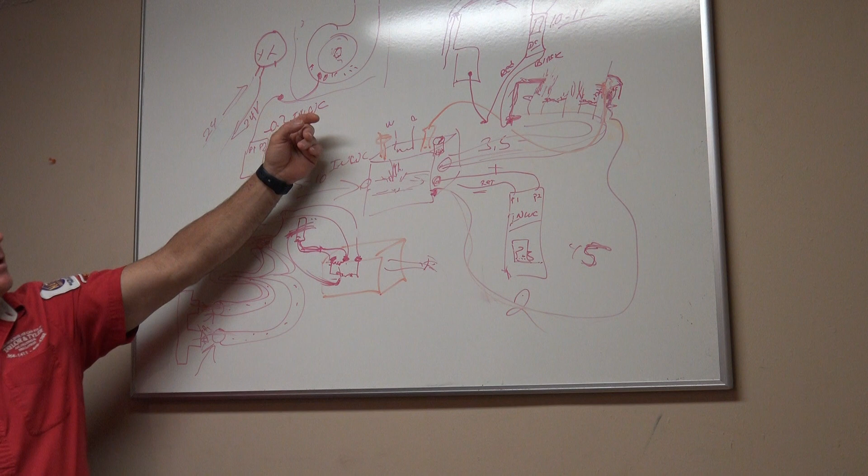It's about wasps. Wasp nests. A whole bunch of wasp nests I've seen up inside there, okay? You take the vent pipe off, you look inside there, you turn your fan on, and sometimes it blows wasp nests out of it, dirt fibers out of it, whatever. You gotta make sure all that's clean, all right?

As it's blowing that gas through that chamber up through there, that pressure as a positive pressure in your vent pipe is creating a negative pressure in this hose to pull in your negative pressure switch.

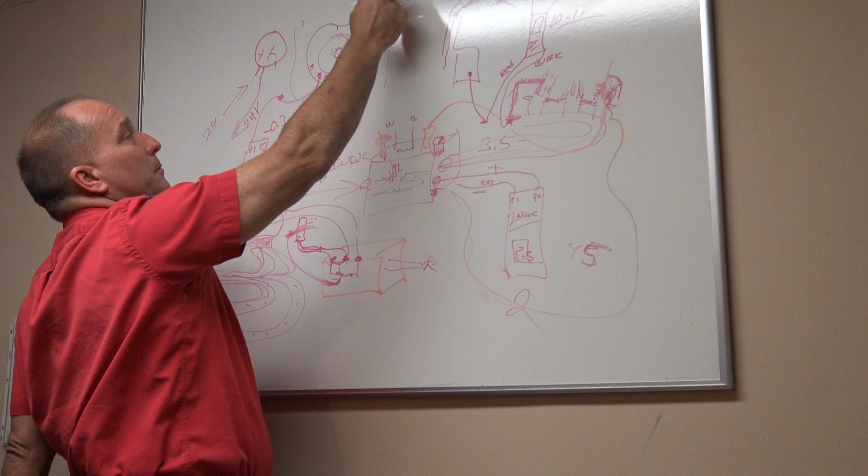On old Bryant furnaces, there used to be where your vent pipe would connect right here. Here's your vent pipe. There used to be a little piece of metal coming out right here, and there was a flame, a temperature switch, a limit switch right here.

So if you clogged up right here, what happened? It can't go this way, it goes this way. It heats up this little switch, and it would shut off that switch. That would tell you that your vent pipe is clogged up some kind of way. Okay, that's the old school one right there.

Alright, limit switches. The most important part of a gas furnace is your limit switch, because your limit switch allows or does not allow the furnace to run. If your system overheats, if you turn your blower motor off, you have to test your limit switch. How do you test it? You disconnect your blower, right? In the heating mode, you run that furnace with no blower motor running, and let it run until it kicks the blower off, until it kicks the gas valve off.

Now, after it overheats, then you have to turn your blower motor back on and allow it to cool down and allow it to reset. This is something different that I want to do this year that we've never done before, but I want to now test the CFMs in cooling mode.

So on that gas furnace, you are going to now take the blower speed that's in the cooling mode. I'm going to call it the black wire on your fan motor, on a split capacitor motor. You're now going to hook that wire up to your lead on your circuit board that says heat, and you're going to remove, I'll call it the red wire, which is low fan on your heat, and let it dangle.

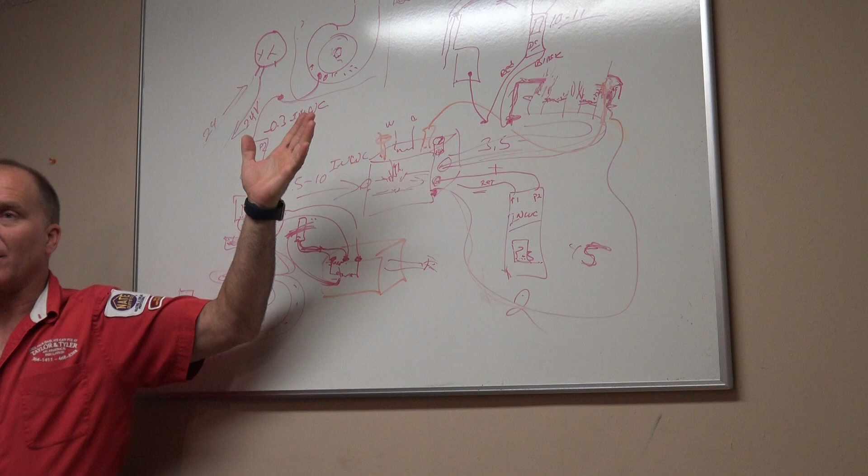After I overheated your heating system, I'm going to go ahead and turn that heater back on, but in high speed now, because that is whatever speed that air conditioner was running at is the one I am using for the heating speed now. When we do that, I'm going to let that furnace run. It's in high speed now, which the air coming out is not going to be as hot as it is if it was on low speed, but that's perfectly fine. That's what I want it to do.

While this furnace is running, I'm going to go ahead and blow my drain line. I'm going to check my return air, make sure there's no return air leaks. I'm going to go look in the attic, and make sure that my ducts and my collars and my vent pipe and all that stuff is in good condition, not falling apart, and everything's good. The insulation in the attic's good. If there's an attic staircase that hangs down, we need an attic staircase tent. Do they have a UV light in the supply plenum? I'm going to make a note of all that stuff and do some of my paperwork to make sure I'm checking everything I'm supposed to be checking.

Now, 10-15 minutes has gone by. My furnace is running after I have overheated it. I got it running in the heating mode. I got my cool speed, whatever speed that one is. I tapped it into my heater speed, and I am running the furnace in the higher speed for cooling. Now I'm going to go check my return air temperature with my laser. I'm going to go to my supply air temperature, and check that as well. I'm going to get my temperature differential between the two of them.

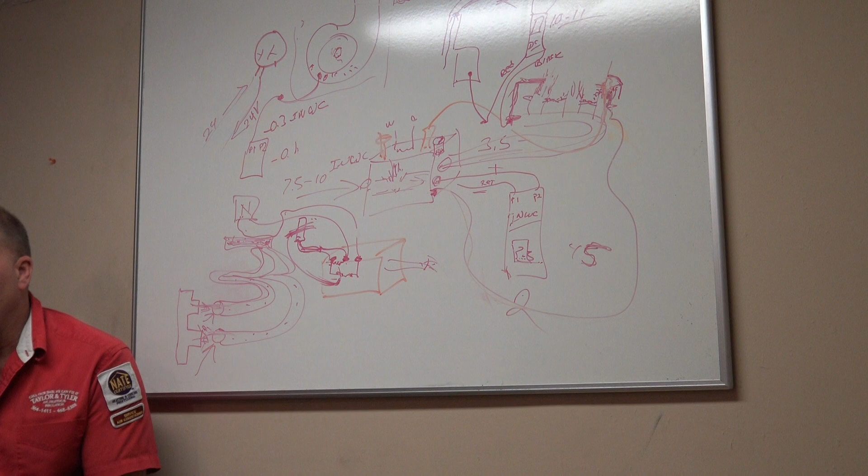Then I am going to go to my Coverns Connect app, which you should have on your phone. If you go to the App Store and go to Coverns Connect, you can get into the app and use a username and password that I can give to you, which is: eGuillory@TaylorTylerAC.com is the username, and the password is capital AC Heat 2007.

Now you have Coverns Connect on your phone, and then you can go into HVAC, go into Tech Services, then HVAC, then go into Calculators, and from Calculators you can select Gas Heat with CFM. Then you will type in your output for your furnace, not the input. You could have 100,000 BTU input.

It's an 80% efficient furnace, so if the output is 80%, you type that in. Then you type in your delta T, and it will tell you how many CFMs you are pushing out of that system at that point in time, with the blower motor or blower speed you are using for cooling capacity.

Once you have checked the cooling blower speed to see what CFM the blower is running at this point in time, say it's 1320 CFM, then you need to check what tonnage unit you have. Say it's a 4-ton air conditioning system. A 4-ton system is 400 CFMs per ton, which is 1600 CFMs. This calculation has told you that you are getting 1320 CFMs out of that system.

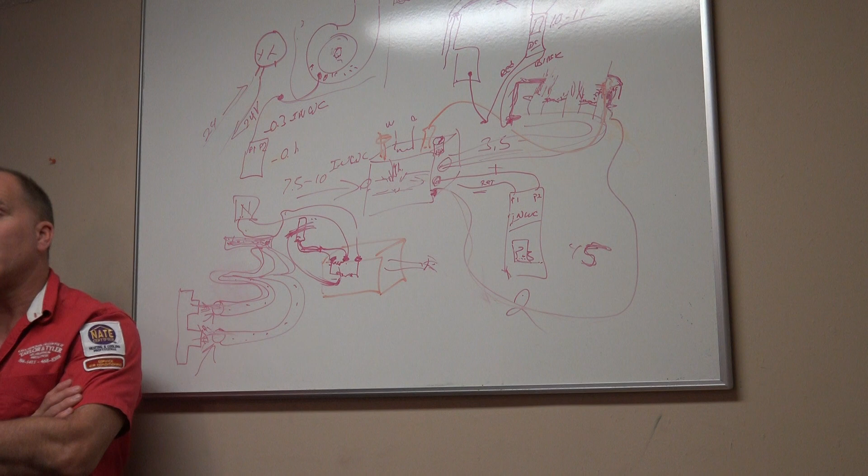If you have way too much airflow on that system -- it's 1320 and you have a 2-ton system -- you are now going to reduce the blower speed of that furnace, possibly having to use low speed to drop it down to 800 CFMs instead of 1320 CFMs. So you drop it down to the red wire, which would be the low fan. You test it again, and now you get 830 CFMs, verifying you do have a 2-ton air conditioning system. That is the correct blower speed for that furnace, for that air conditioning system.

Now, since you have been running this system at 1320 CFMs all this time, it was charged at 1320 CFMs. You now have to go check your head pressure, suction pressure, superheat, subcool, and delta T, and verify that your air conditioning system is charged properly, or you will totally screw everything up. You've got to be thorough, and you've got to know why you're doing what you're doing on everything that you do.

That was a lot. Any questions?

Did all that stem from the limit switch, guys? Yeah, well, I just get on rants, don't I? Well, it's important because that's one of the most important safety features in the system.

So a limit switch: A is okay, tested and reset to the closed position. Open, the limit is open and will not reset, replace the switch. Closed, bad, will not open, replace the switch.

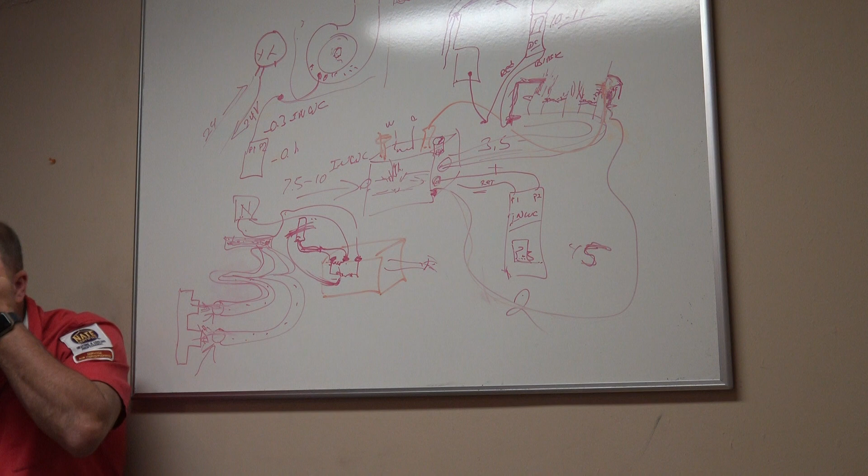Alright, your circuit board - what are you checking for? Is it mounted properly and secure? Okay is it works fine. Bad means it's not sending voltage to the fan relay or other components. Miswired means the wires are not in the correct location, causing malfunctions. Repair it or replace the board, whatever you need to do to get it running. You also have to know as a technician how that board works, what its functions are, and where your voltage is going.

Once voltage goes inside the board, it's lost from there until it comes out to go do something else. So don't try to diagnose and repair a board - there is no repair, you just replace the board. We are not ITT techs.

Ignition systems we talked about earlier - spark ignition, glow coil, pilot, all are ignition systems. The board sends voltage through the spark igniter and grounds on the burner, causing a spark. A glow coil has voltage applied to the ceramic coil, which heats up like a heating element and ignites the gas over it. A pilot could be a standing pilot or one that uses spark ignition and flame rectification before the gas shoots over it into the chamber. We just got finished going over all those ignition systems, right?

I just beat the test here.

Okay, everything works fine - burners are lit, or the pilot ignites. Fair means low pilot, sparks not in the correct location, old and oxidized - you've got to clean all that stuff to get the correct sparks out. Poor means rusted from water or bleach hitting it, and it does not spark, glow, or ignite - so replace that.

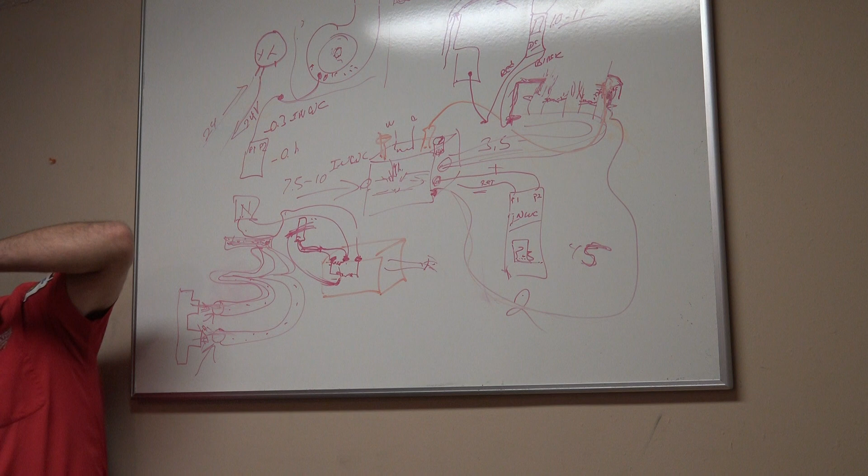Look, it's kicking your rollout switch out. Why is your rollout switch popping out? Because the flame's rolling out looking for oxygen - it's used all the oxygen inside that closet and now it's looking for more. So you have to open up the top and allow fresh air to come down, or you've got to run a vent pipe down. You're supposed to run a vent pipe down in any way, shape, or form.

That 4 or 6-inch vent pipe that comes down has got to be strapped to the wall, and it has to be higher than the insulation in the attic to allow air to come down - if they insulate, it's not going to cover it. And it needs to be below your burners as well.

Lazy flame: gas pressure is low, not enough oxygen mixture, red tips need to be fixed. You can adjust gas pressure, clean the burners, things of that sort with a lazy flame. A lot of times it's gas pressure. Poor flame, high flame rolling out, lazy flame - that's high pressure from the gas valve or very low pressure from the gas valve.

Watch your flames, guys. Look for red tips on them, okay? And a lazy pilot.

It starts from the ignition system or the old match. The pilot should be a blue flame that you can hear when properly run. Low gas pressure from a clogged pilot piston will cause a red flame. It may not ignite the gas when the gas valve is open. This could cause a boom. So if you got a very low pilot on an old system and you shoot gas out of it and that pilot is very small, it may take a while for that gas to build up before it hits the flame, and then boom - you will hear a boom, no doubt.

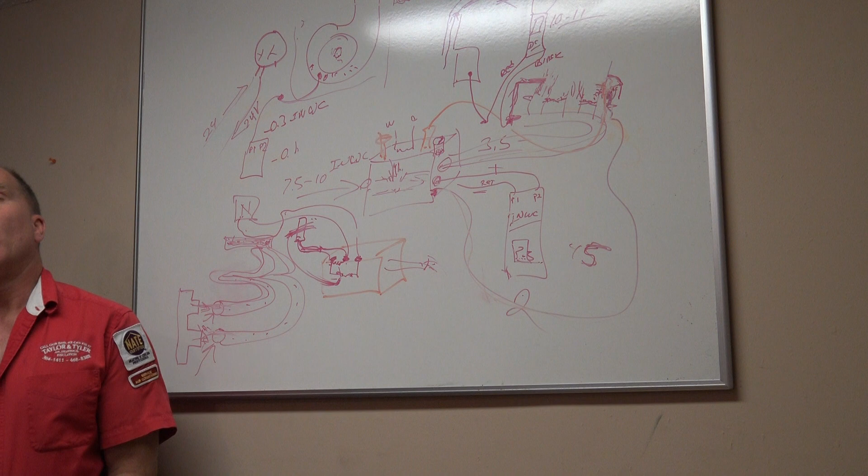Okay, the pilot assembly goes back to the pilot with too big of a piston. Mainly on older units, wall furnaces, floor furnaces - make sure the flame is correct, facing in the correct location. The old assemblies, pilot assemblies, spark igniter assemblies, thermocouple - they have a left, a right, and a center flame throw. So which one are you at? Is the flame throwing left? Is the flame throwing right? Is the flame throwing center? Based on how that thing is actually made.

If you purchase a center and it had a left, then the flame is not being thrown, the pilot is not being thrown over the flame, and you will get a boom maybe. So you can't readjust it, it's thick metal - you just gotta buy the right one. So if you happen to pull a pilot assembly off of a system, you got to make sure you get the right one. Okay, and we have them here from old school.

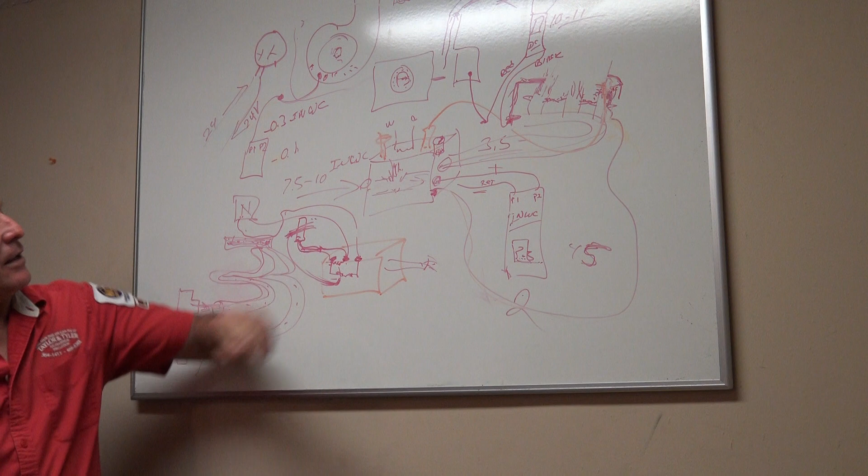Now, where the arrow's facing on the left-hand side here, this little arrow has got to be touching this metal. If it's touching the metal, that will allow your heater to come on. If they turn that little knob and it faces this little opening, and the arrow's facing up with the back end facing the opening, the heater will not come on. If the little wire is broken, the heater will not come on. If the heat anticipator is set wrong and you put your thermostat on 73, it may run to 76 and shut off.

Or it may not come on until it's 68 if the heat anticipator is set wrong. Heat anticipator, what does that mean? It anticipates when the heat should come on - hence the name heat anticipator. You're rarely gonna see those though.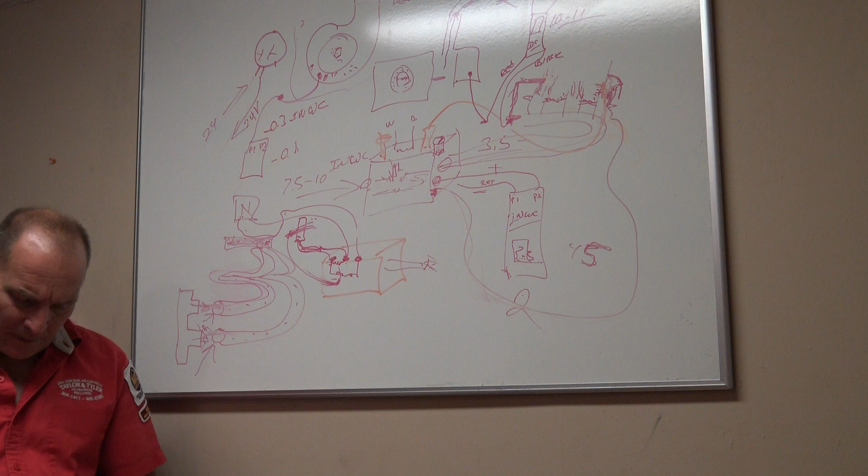Rarely, yeah. The choice you have is to set the heat anticipator, okay? Let me finish reading the first part of it. This is the dial on the sub-base of the old mercury thermostat. It has a metal arrow with a metal thin wire with numbers on it. Set the arrow to the amperage draw on the amp probe.

Maybe 0.4 amps, not 4 amps. If the metal wire ring is broken, the heater will not come on. If the back side of the arrow is not touching the wire, the heater will not come on.

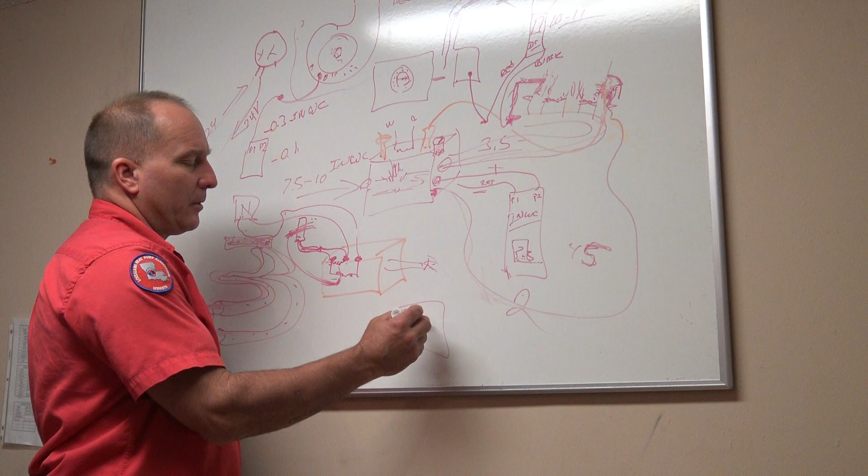We have to set the heat anticipator, and how do you set the heat anticipator? You take the sub base off, and what are you left over with? You're left over with the base of the thermostat, which has common, W, Y, G... what else? W, Y, G, R. There's the other one I'm missing. The power. How about that?

You have to take your meter and go W to R. Then you're going to take your meter that's got an amp probe on it, and run that wire through your amp probe, and read very, very low amperage. 0.04 amps, 0.02 amps, 1.2 amps, okay?

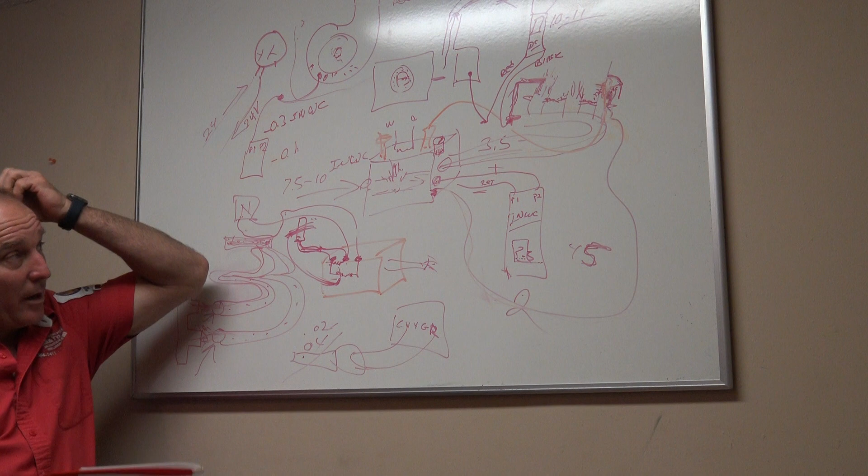When you jump off W to R, you are running your gas valve, you are running your heat sequencers. You have to let the entire system come on and run. Whatever your amperage is reading is what you set your heat anticipator to point to. Then plus your thermostat's got to be level. Then that will tell that heat anticipator when to turn on and turn off.

If the heat anticipator is set wrong, it heats up the helix coil inside, which pushes the mercury bulb over, too fast or too slow, whichever way you set it wrong. Digital thermostats don't do any of that.

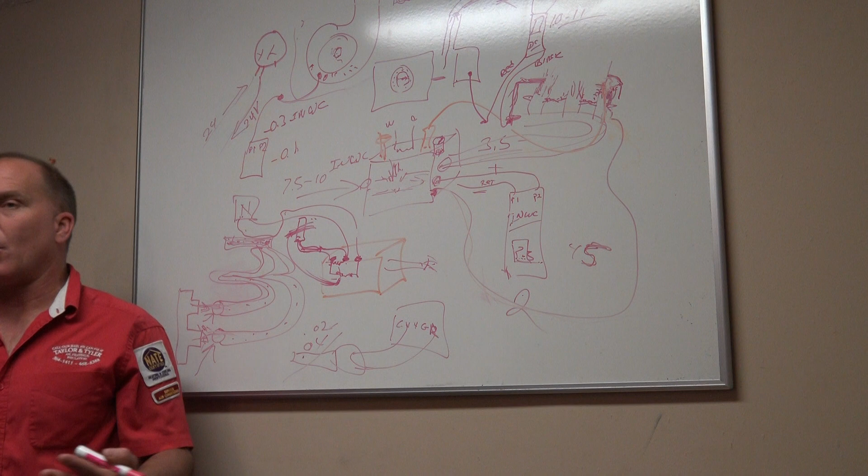Alright, check your CFM as we talked about earlier. If you have an electric heat system, you will do the same thing as we talked about with the gas heat system. You will take the blower speed from your electric heat system, if it's different from your cooling system, and put the blower speed for cooling on whatever relay the heater blower speed is on.

The reason I don't care about it is we have 2 weeks of hot weather, cold weather. With those 2 weeks of cold weather, I do care what your delta T is in heating mode, meaning what should it be? Between 30 and 55 degree delta T in heating mode.

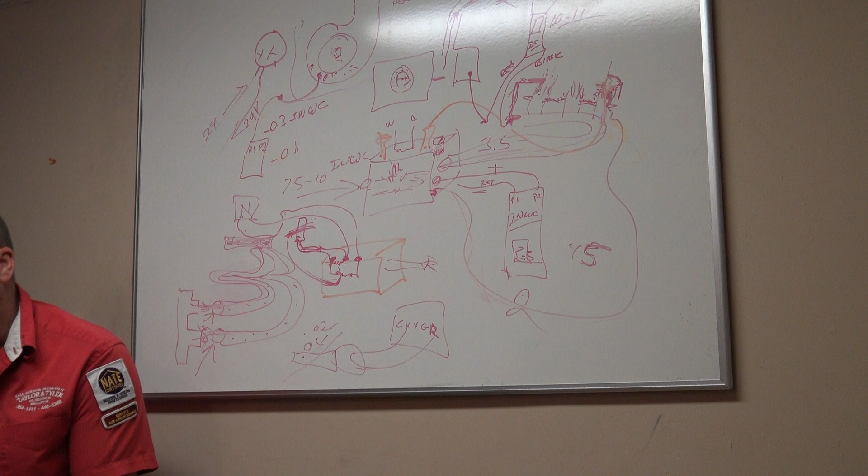If you're running a 20 degree delta T in heating mode with an electric heat system, what do you need to do? Normally what's happening is that air handler only uses one blower speed. Many air handlers use one blower speed for cooling, the same blower speed for heating. When they do that, you have got to be ingenious.

You have got to sometimes add a relay to the system. When you add a relay to the system, you can now run the heating system with a low fan, and then the high fan run for cooling.

If you are running the low fan or high fan at this point in time for your heating, and your delta T is 20, we need to lower your blower speed so that your delta T for your heating does come up.

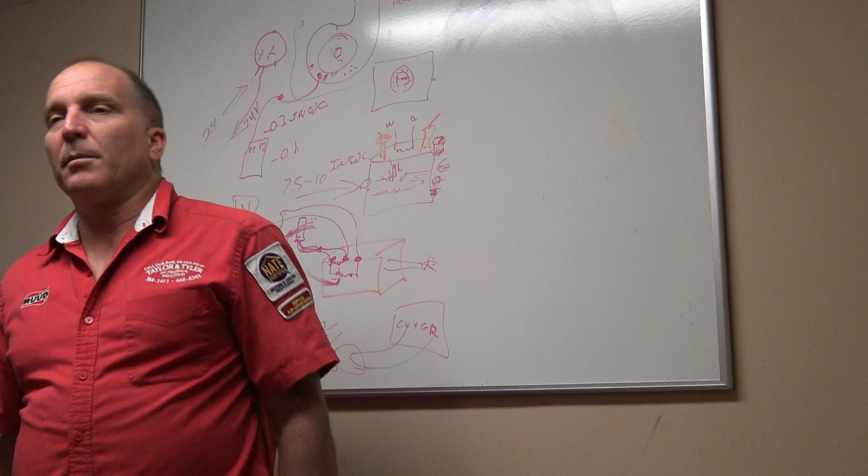If I have a 15 kW electric heat system and that blower motor runs on high fan, which again most of them do, 15 kW heat with a blower speed pushing, I'll say 1600 CFMs of airflow over it. 15 kW heat is how many BTUs?

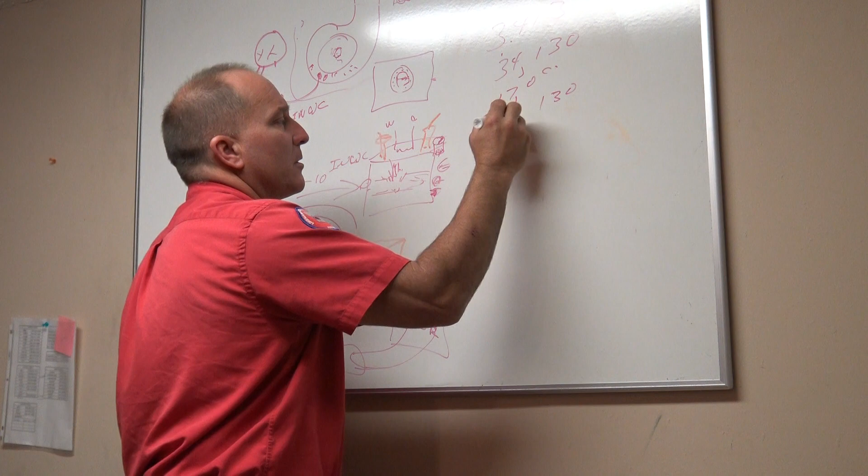3413... 3.413 BTUs per kilowatt multiplied by 15. So if I multiply it by 10, that's going to give me 34,130 BTUs. If I take half of that, that's 17,000 BTUs, in that ballpark. So let's carry that 130, and then we'll go 11, 1, now it's 51,000 BTUs. So that's 15 kW heat.

If you are running a 10 kW heat system with a blower speed running at high speed for 48,000 BTUs in cooling mode, and you're getting a 20-degree delta T there, you want a 30 to 55 delta T in your heating mode, which means you have to lower your blower speed down to make the heating elements get hotter. How do we do that?

You've got a blower motor here, and I am using L1 right here, okay?

That's my power coming into that motor. Here's my other power coming into the motor, that's L2. You've got a relay on here, and that relay is what's actually energizing things. L1 is coming in here, and then it's coming into a relay, which energizes your fan, because I got L2 coming over here, which is now energizing my motor.

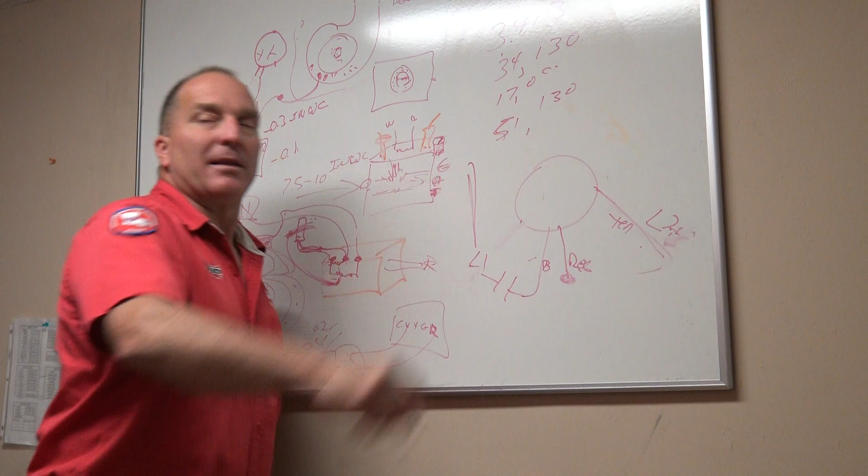This is a black lead, and we're going to call that high speed. This yellow wire comes over here attached to L2, so the black and yellow wire feeds my 220 volts, which feeds my blower, and my blower motor is running. I have a red lead here that's taped off and not being used. So I want to lower my blower speed for the electric heat system so that my 10 kW heat gets a lower blower speed over it and heats the home better, because I don't have a big enough wire to run 15 kW heat, so I have to run a lower blower speed so the existing 10 kW heat works better.

What if this house is an old New Orleans home with single pane windows, above ground, and no insulation in the floors? Then the answer is you need 15 kW heat - they'd need to run a new wire and add another heat strip. But in this case, it's a slab house, 1,500 square feet, and we just happen to use 10 kW heat, but the blower motor spins too fast, so here's what we have to do.

This black wire for my high speed is energized by a fan relay, and this fan relay - I'll call this, for argument's sake, my G and common - which energize and close this switch, which turns my fan on.

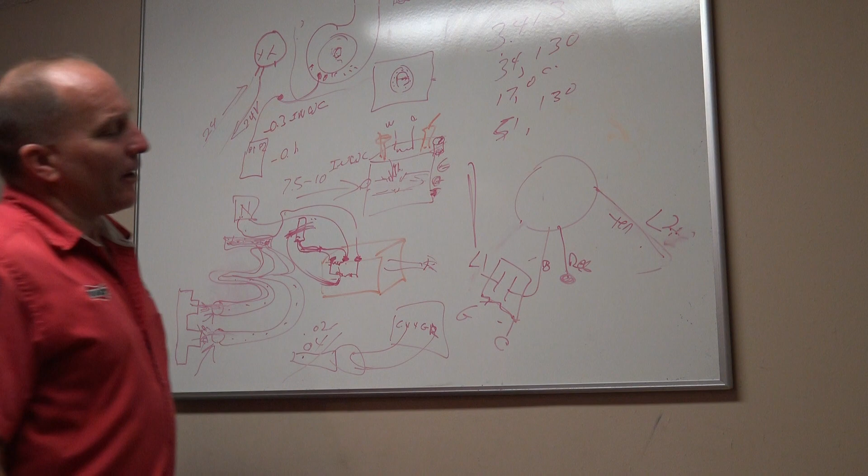So if I go in here and add a 90-293 relay, with my coil at the bottom, I'm going to connect W to this side, and get common on this side. A 90-293 relay is a normally open, normally closed switch. So what I need to do now is cut this black wire right here, take it and power it into here. Then I need to take this black wire and run it right around over here to be normally closed. Did I change anything about how the system works at this point in time?

I did not, no. Because all I did was hook it to a normally closed switch. Didn't change a thing.

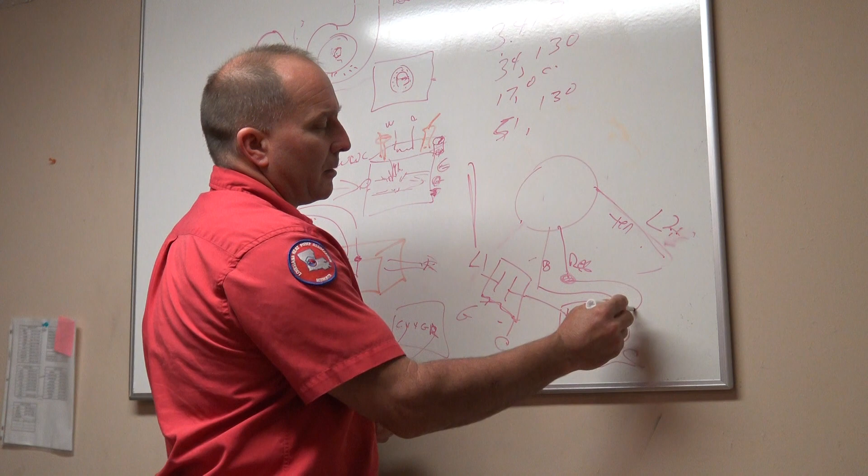No, you didn't attach the red to the new relay yet. I will. My red wire now comes and attaches to here. When I go turn my air conditioner on, I am not energizing W, right? I run on high fan. If I just turn my fan on, I'm not energizing W, I run my high fan. When I turn my heater on now, I energize W, which closes this switch and opens this switch, and I run on low fan. Now I have less airflow over my 34,000 BTUs, and I have hotter air coming out and a bigger delta T.

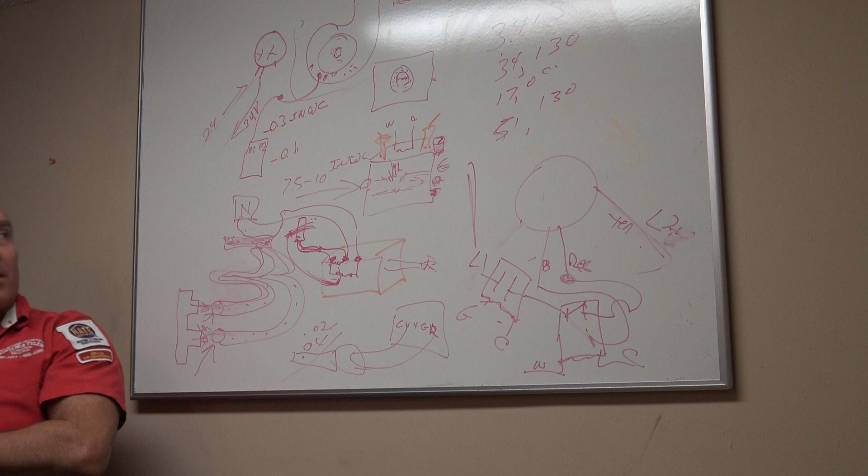Make sense? Yeah. So this is the end of one part - some part in electric heat, some part in gas heat, but this is the first check. We've just finished the first 16 points, and there are others until we get to the other parts of the heating check, which we'll do on electric heat in another video and finish this off. Are there any questions on the gas heating system and what we need to check with gas heating systems?

I'm glad I finally put all this on video so I never have to do it again. I'm just gonna say, sit here and watch the videos.

Well, it's easy when you want to make it sink in. I mean, any questions, guys? Self-explanatory? Yeah, okay. Oh, it's self-explanatory, but you did a good job explaining it.